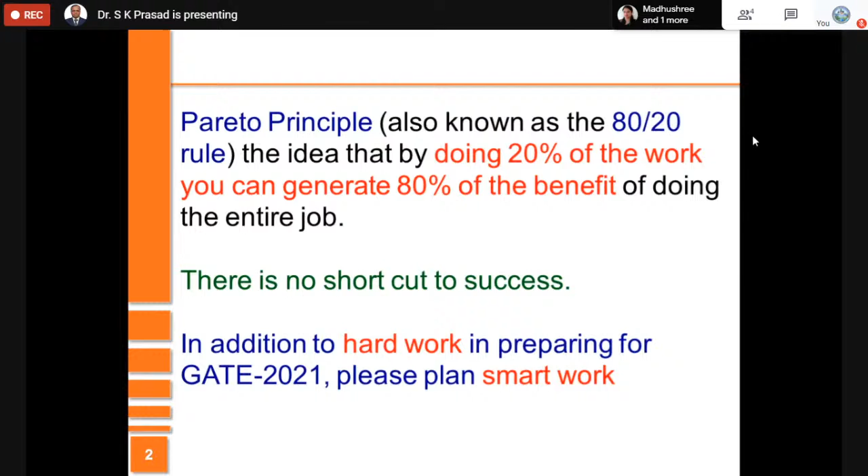He made a good statistics of how GATE questions are covered from 1991 till date. So naturally, statistics plays an important role in giving some idea about the background and the mentality of the question paper setters. Interestingly, you will notice that from the point of view of geotechnical engineering, any GATE examination is very hot in the sense maximum questions come from geotechnical engineering.

Keeping that in mind, and also understanding that geotechnical engineering covers two courses which you do in your undergraduate career, possibly one in 4th or 5th semester, another in 5th or 6th semester, one textbook is sufficient. If you thoroughly understand that, to crack geotechnical engineering in GATE examination, you should not have much difficulty.

And if you do that way, you are very sure that you will approximately get about 15% of the marks, and 15% marks is not a small amount in GATE. So if you take any other discipline, say structural engineering, you may have to study much more vast syllabus. So put in good effort in geotechnical engineering.

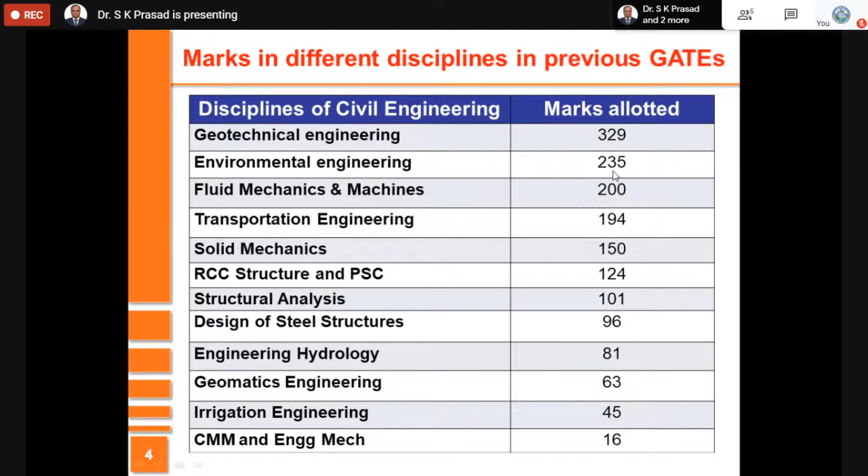He made an analysis since 1991 till date. Maximum marks is allocated to geotechnical engineering. The next highest is environmental engineering, which falls much behind this, almost 60-70% of geotechnical engineering.

So there is every possibility that even this time you have the same kind of trend, like retaining wall, deep foundations, stability of slopes. I'm not sure how much I'll be able to cover today, but these are the portions - what you see on the right side are the portions which I'll have to cover.

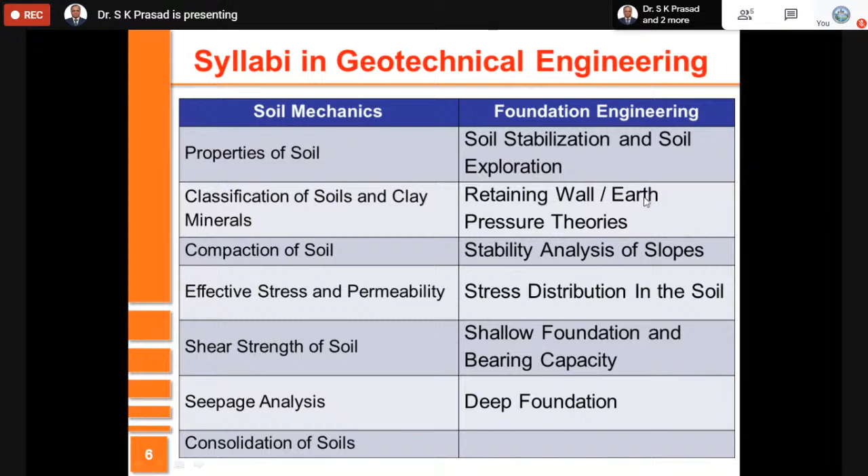I'll be spending my next lecture on foundations, both shallow and deep foundations. I'm hoping that I'll cover these 4 topics today, and I'll have to see how much I'll be able to cover. So these are the syllabi from foundation engineering.

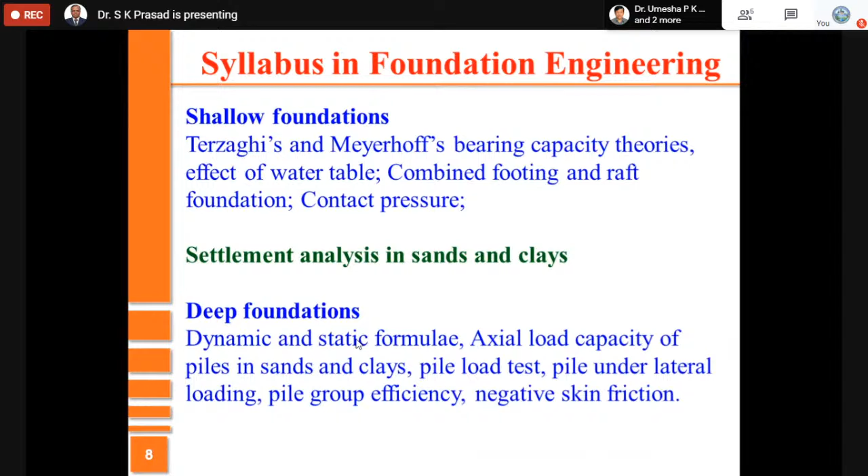As I said: subsurface investigation, earth pressure theories, stability of slopes, and stress distribution in soil, along with the topics related to foundations, both shallow and deep foundations, including settlement analysis.

I'm taking earth pressure theories first because that's one thing which has more emphasis by the question paper setters. There are many researchers who have worked on earth pressure theories, but two classical ones we always talk about are one by Coulomb and another by Rankine.

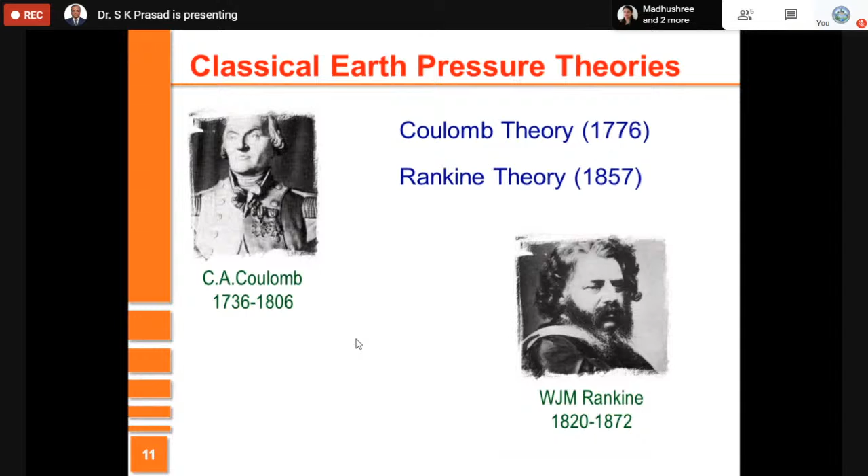Coulomb gave his theory much before geotechnical engineering started getting recognition. We say that geotechnical engineering started getting recognition from the point Professor Terzaghi came into being as a professor in soil mechanics. So in 1776, Coulomb gave his theory, followed by Rankine about 80 years later in 1857.

I'll start with Rankine's theory because it is more analytical, unlike Coulomb's theory, wherein you prefer to use graphical method. So he made a number of assumptions. Unless you make assumptions, you cannot formulate theories. And especially in geotechnical engineering, where a lot of complexities are involved, you need to make many assumptions.

Some of the important assumptions which we generally make in soil mechanics are: soil is isotropic and homogeneous, which never is the case. And in this case, soil is considered to be cohesionless while deriving, but then you are adding the effect of cohesion in an indirect way.

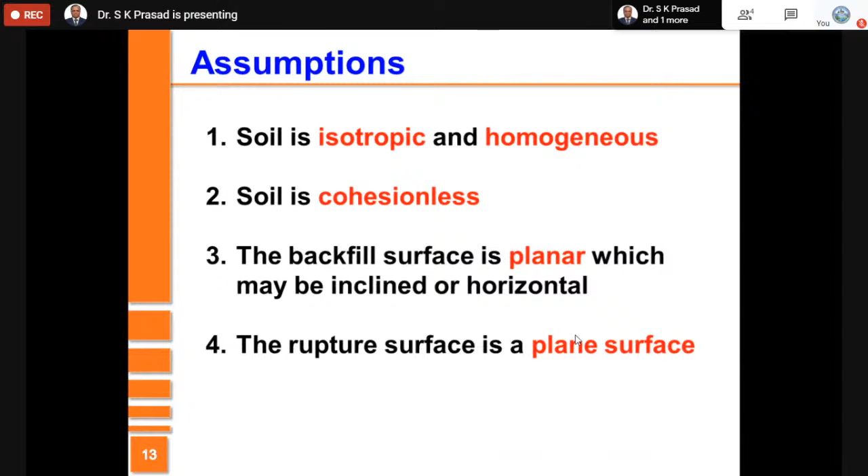And it is planar - basically it's planar. Therefore you may be able to represent the problem in a two-dimensional plane strain situation. Therefore even the failure surface is also considered to be planar. And how accurate is this assumption? Very difficult to say. But then this assumption gives us an opportunity to make our theory relatively simple.

And the failure wedge is a rigid body which experiences translation, so it experiences only one mode of movement.

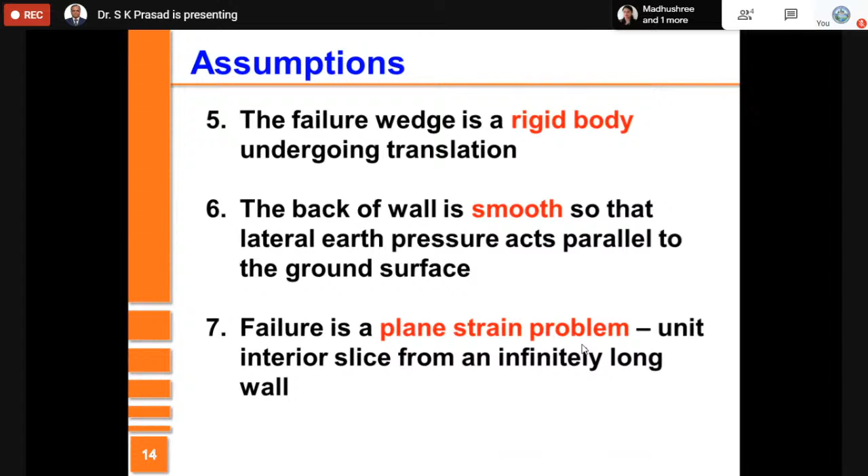Back of the wall is considered to be smooth. Strictly, it will never be smooth. But then, once we consider it smooth, we can avoid the friction between the wall and the backfill soil. Likewise, I said it is a plane strain problem by assuming that we can convert a conventional, regular three-dimensional problem into two dimensions.

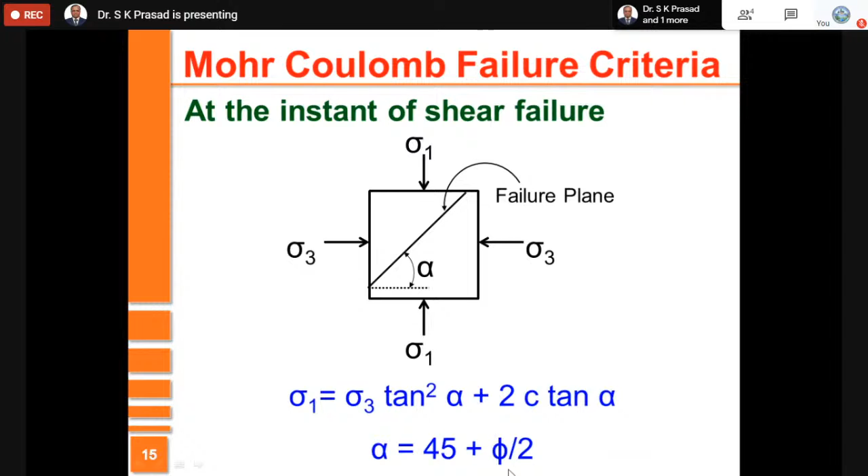Why do you require earth pressure theory? Because in any construction, there are many areas in which you'll have to store earth at two different levels. On one side it is at a higher elevation, on the other side at a lower elevation. This can happen in large embankment kind of structures, and it can happen in underground structures. So you need to hold soil at two different levels.

Soil is a very special particulate material. It just cannot stand by itself vertically. For you to make it stand vertically, you will have to think of some indirect method, or build a wall. When you build a wall, automatically the wall will be subjected to a horizontal pressure by the earth behind it. We have to estimate how much is that pressure, at what level the resultant of that pressure acts, and we should be able to design that wall to take care of that.

So from the point of view of geotechnical engineering, broadly we consider 3 earth pressure criteria: 2 extreme cases of failure, and 1 earth pressure at rest. So earth pressure at rest state, active case, and passive case. These are the 3 cases which are considered.

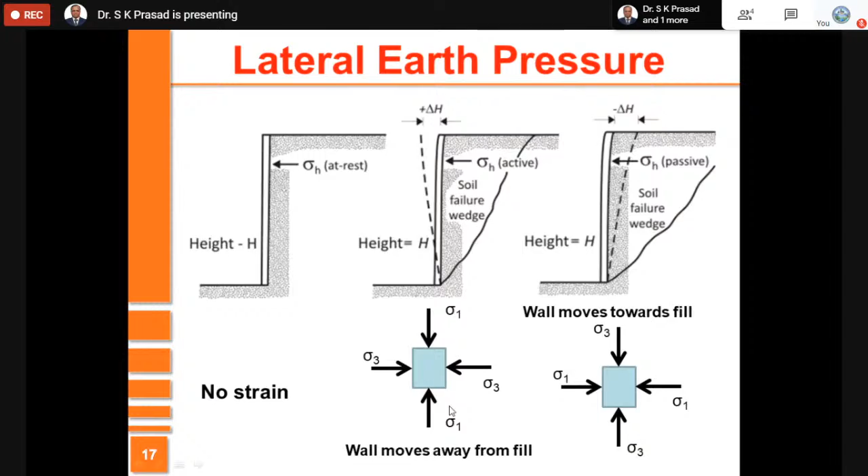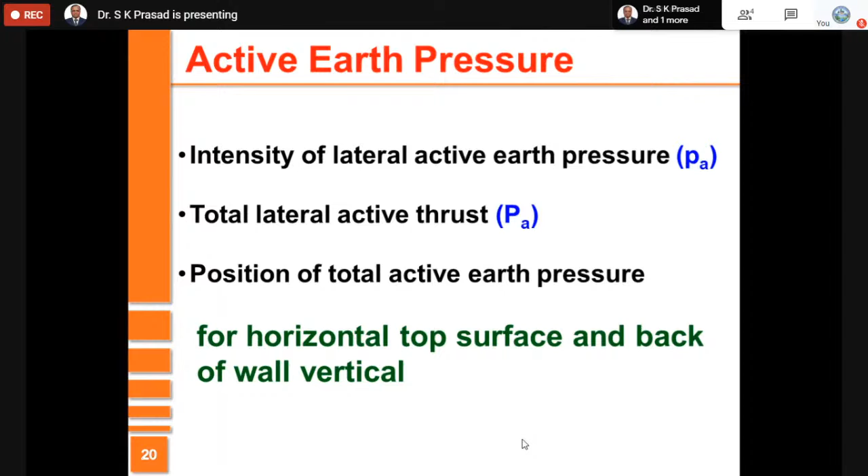Very quickly, I try to go on to different situations in earth pressure. So I'm considering the simplest case: you have a wall, smooth vertical wall, and the soil is horizontal along the backfill portion, and this entire soil is homogeneous. And in active situation, please remember sigma 1 is vertical, sigma 3 is horizontal.

I consider any element at a depth Z below the top surface of the soil, and note that in active case, sigma 1 is bigger than sigma 3, or in other words, the vertical stress is bigger than the horizontal stress. You need to remember that if you have water or any fluid, then the stresses are uniform both in vertical and horizontal direction. The pressure of water is isotropic at any depth.

That means if you consider at some depth, let's say 1 meter depth, water is approximately having a density of 10 kilonewton per meter cube. So at 1 meter depth, the pressure will be 10 kilonewton per meter squared, both in the vertical direction as well as in the horizontal direction.

In case of soil, which is always very peculiar, particulate in nature, at 1 meter depth, if I assume the density of soil is 20 kilonewton per meter cube, then the vertical pressure will be 20 into 1, 20 kilonewton per meter squared. But the horizontal pressure may be either less or more than 20.

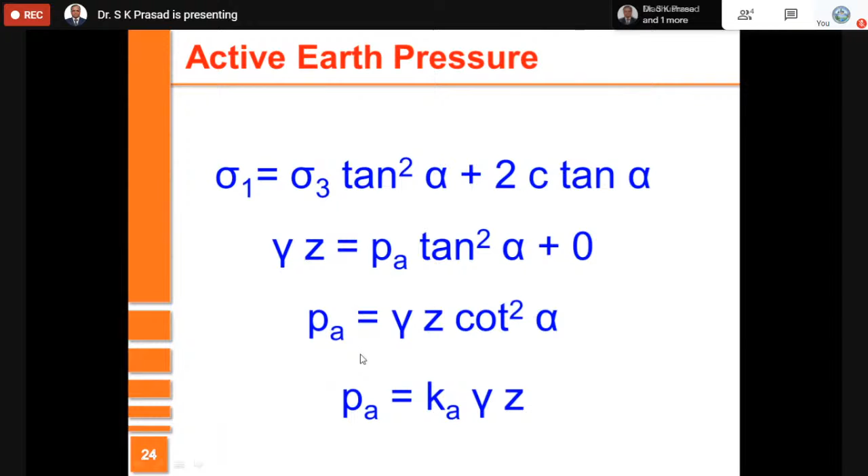This cot squared alpha is represented as a coefficient of earth pressure, and in the extreme situation this K is Ka, that is coefficient of active earth pressure. So cot squared alpha is equal to Ka, which trigonometrically equals cot squared of 45 plus phi by 2, which is also equal to 1 minus sin phi by 1 plus sin phi. If phi is the angle of internal friction of soil, then Ka, the Rankine's coefficient of active earth pressure, is equal to 1 minus sine phi by 1 plus sine phi, or simply cot squared of 45 plus phi by 2. Therefore, the active earth pressure is equal to Pa is equal to Ka gamma Z.

I want you to remember this. So active earth pressure will look like this, and then where will it be maximum? At Z equal to 0, active earth pressure is 0. And at Z equal to H, active earth pressure will be Ka gamma H. So it is triangular, okay?

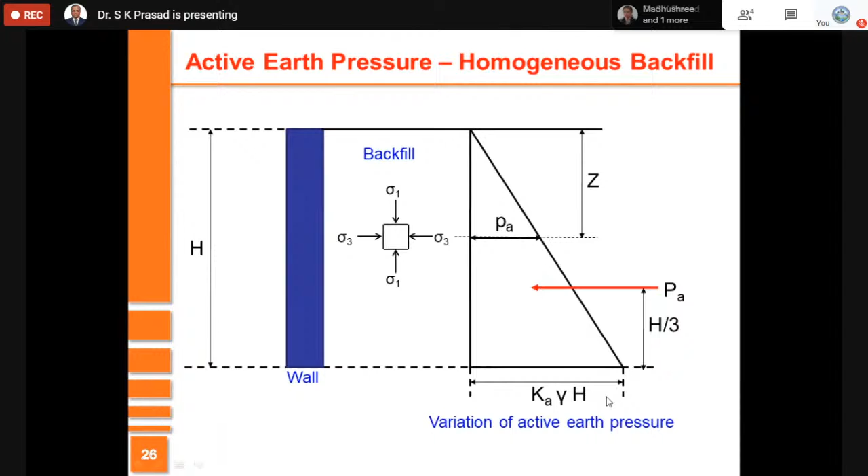Hence the pressure intensity is 0 here and maximum here. So the resultant total pressure will simply be the area of this triangle, which is half into the intensity of pressure multiplied by height, which I call capital PA. Capital PA happens to be the thrust, the total active thrust. And where does it act? Because it is triangular, it acts at a height h by 3 from the base. And PA is equal to Ka gamma h squared by 2. That's what I have put here. I want you to remember this, and this basic fundamental formula you should all have in mind.

So then I keep on applying some additional features to it. In the earlier case, I had considered a situation when there is no surcharge at the top. There may be surcharge due to some structure acting on it, or surcharge because of the overburdened soil above it also. So if there is a surcharge of intensity Q, then you have the original triangular loading due to the soil behind the backfill, and you also have a rectangular loading due to the surcharge, which is equal, in magnitude, to Ka times Q.

Ka happens to be the property of the soil, the coefficient of active earth pressure, equal to 1 minus sine phi by 1 plus sine phi. And here it is Ka gamma h, which is triangular. So you need to consider this plus this. So whenever there is a surcharge, please do consider this additional earth pressure, which is equal to Ka times Q. So always the effect of any surcharge is to increase the earth pressure, and that surcharge will have uniform value from the top.

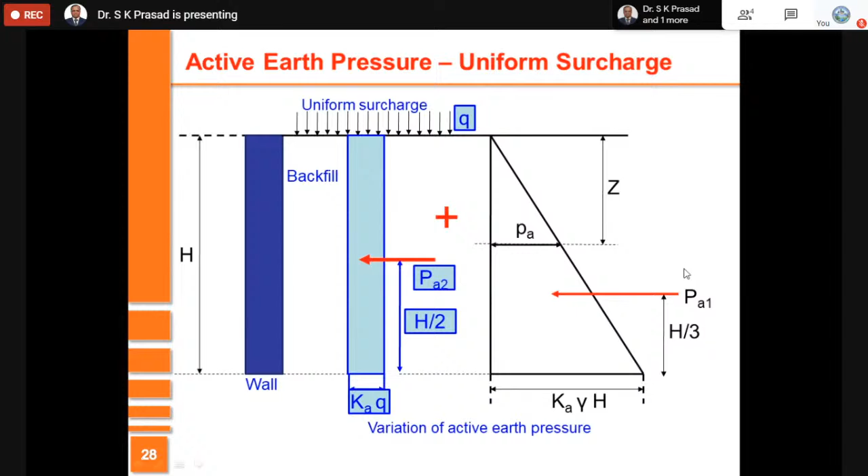So your PA will now be a combination of these two, PA1 plus PA2. PA1 is the case I mentioned previously, Ka gamma h squared by 2. And PA2 is the effect of surcharge, which is Ka into Q into h. And where does it act? It's just your basic fundamentals of mechanics: for a triangular load, the resultant will be at h by 3 from the base, or 2h by 3 from the apex, whereas for a rectangular one, the resultant will be at the center. So the resultant for these two will be a combination of these two, which we'll have to work out using the mechanics principle.

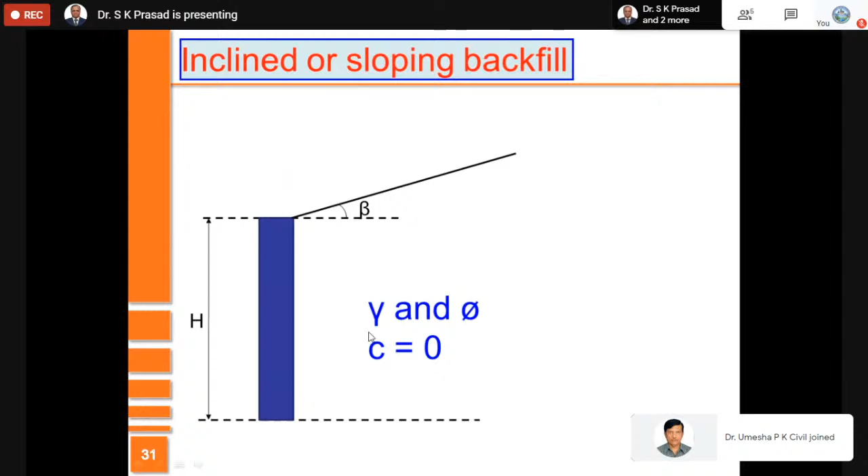You also may have an inclined surcharge. Whenever there is an inclined surcharge, the earth pressure is going to be high. When the inclination increases, earth pressure is likely to increase many folds. And hence, when you are talking about a retaining wall in a hilly terrain, you have to be extremely careful. There have been many failures because of wrong understanding of the earth pressure in these cases. You need to actually consider this effect, and for that you have a big formula.

I wouldn't advise that you should remember this formula, but you should know that in Rankine's theory, we assume that the resultant active earth pressure is also proportional or parallel to the surcharge inclination, so it is inclined at an angle beta. You calculate PA, that is total thrust, the same way you calculate for the other case. But Ka is not going to be just 1 minus sine phi by 1 plus sine phi. You are using this formula, which is a function of not only phi, but also beta. You notice that when beta is 0, this will reduce to that same formula, 1 minus sine phi by 1 plus sine phi. But when beta increases, this value increases enormously. That's what you have to take into account, and hence you have a triangular load, something like this.

Then you also have a situation when the wall is not vertical. If the wall is not vertical, you have a triangular wedge of this backfill which will be carrying this extra load. So what we do is we consider the weight of this. You calculate PA1 exactly the same way as you have for vertical wall. Then you consider these two forces, one vertical force, another horizontal force, and find the resultant of these at whatever inclination you get depending on this angle alpha. So that's the only correction which you need to apply.

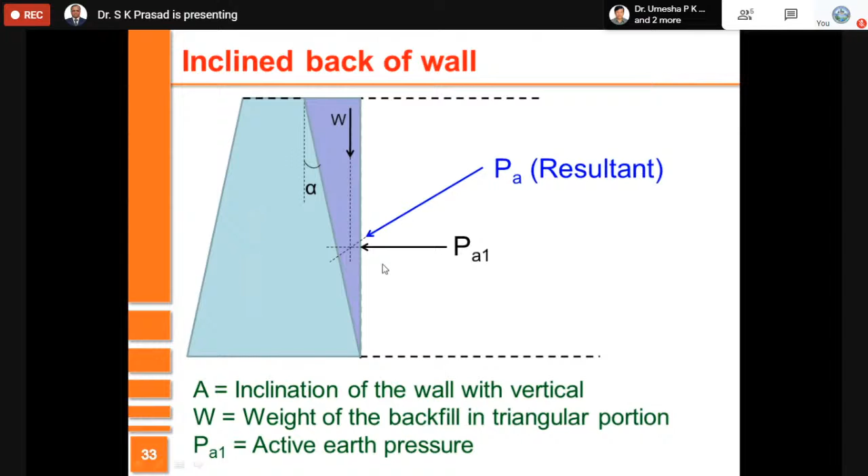And this is all about the earth pressure theory with respect to cohesionless soils for the active case. So then you have the cohesive soil. In cohesive soil like clay, to some extent silt, you need to consider the effect of cohesion, which is one of the other shear parameters. So here you consider C also.

So PA now is no longer only a function of phi, but PA is equal to gamma z cot squared alpha minus 2c cot alpha, because this goes to the other side. So what does it mean? Effect of cohesion is to reduce the lateral thrust. So if you have a cohesive soil, maybe it is able to stand by itself for some height. And at the top, there is a likelihood that there will be some amount of tension. So that's what you have to keep in mind.

So PA is equal to gamma z Ka, cot squared alpha is Ka, minus 2c times root of Ka. And Ka is 1 minus sine phi by 1 plus sine phi. So as I said, all these are positive thrust pushing the wall. But at the top, you have tension. Wall moves, the soil, backfill soil, moves away from the wall. It reduces the stress, so this is on the negative side.

Therefore, sometimes we try to find out till what height this soil can stand without the wall. Naturally, this is negative, so this total will be equal to earth pressure 0. So if I can find out Z naught here, HC is simply 2 times Z naught, and this is negative minus 2c root Ka. How did I get it? Because at Z is equal to 0, this is 0, Pa is minus 2c root Ka. And this value Hc, very easily you can show that it is equal to 4c into root of Kp.

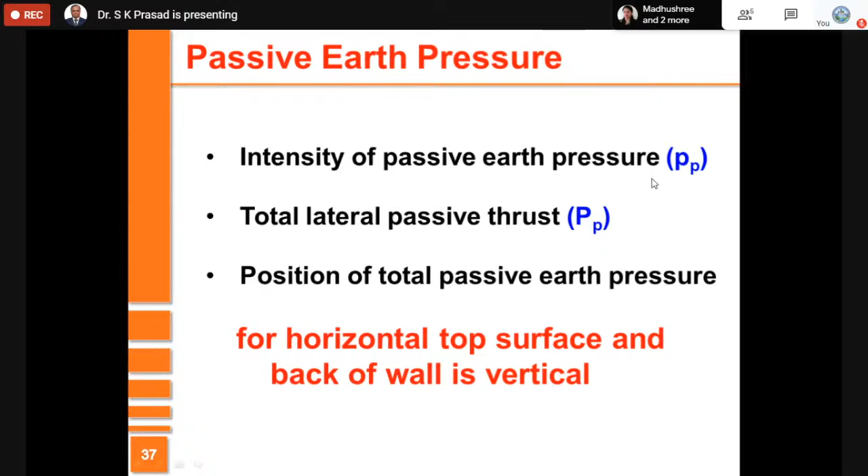Passive earth pressure is very similar to active earth pressure, but in this case the horizontal thrust is bigger. Sigma 1 is the horizontal stress, whereas sigma 3 is the vertical stress. So in this case, sigma h is greater than sigma v.

If you apply the same formula at the time of failure, sigma 1 is sigma h, which is Pp. Sigma 3 is the vertical stress, gamma z. Substitute, and you find Pp equals reciprocal, Kp equals reciprocal of Ka. So 1 plus sine phi by 1 minus sine phi, or Kp equals tan squared of 45 plus phi by 2.

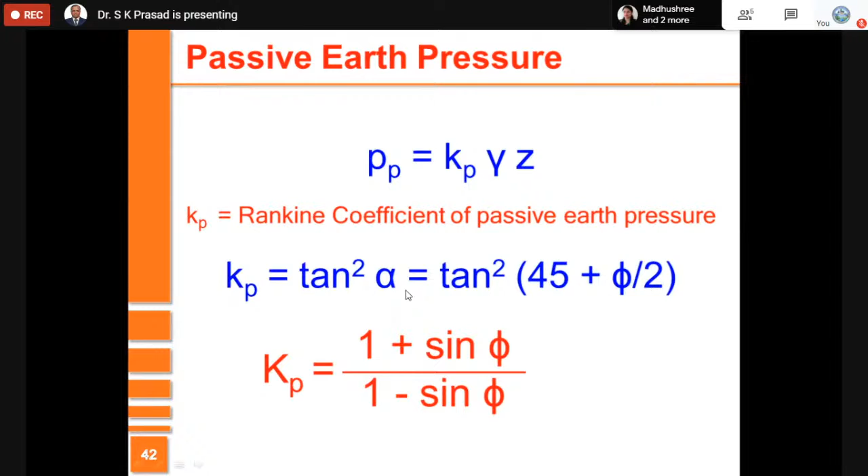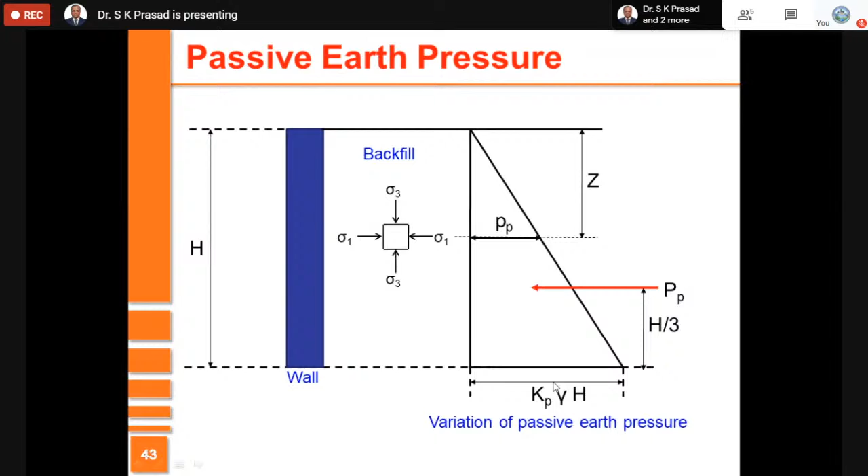When I apply the same rule, the distribution will also be triangular, but this is Kp. Kp is a much bigger value, greater than 1. When phi is equal to 30 degrees, Ka is equal to 1 by 3, and Kp, the reciprocal, is 3. So for passive earth pressure, total thrust will be equal to Kp gamma h squared by 2.

The basic limitations of Rankine theory are that you assume the wall is smooth, so you don't consider the roughness of the wall. If you consider roughness of the wall, you need to account for that extra frictional force, which is not considered. Also, cohesion is used indirectly here; it is not explicitly defined.

So I'll very quickly take up a few GATE problems. You'll have to read this properly.

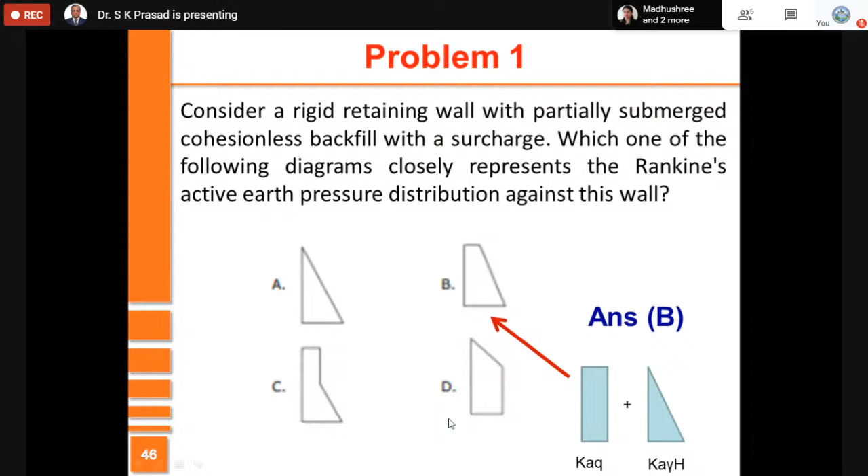Consider a rigid retaining wall with partially submerged cohesionless backfill with a surcharge. Whenever there is a surcharge, what is the best pressure distribution? Without surcharge, for homogeneous soil, the pressure distribution is triangular. For surcharge, you consider rectangle plus triangle, as I told you earlier. Therefore B is the best possible solution, not A, not C, not D. So very quickly you should be able to point out that it is B.

Again you'll have to read it, it takes some time. That's why in the GATE examination I want you to read the question thoroughly, especially in geotech, because the phrasing is too lengthy.

You have a retaining wall of height h with a smooth wall. Whenever it is a smooth wall, Rankine theory can be applied. It has a backfill inclined at an angle beta with respect to horizontal, consisting of cohesionless soil only, with internal frictional angle phi. If the active lateral thrust acting on the wall is Pa, which one of the following statements is true?

I take the first one itself, which is the answer. Please note, whenever you have an inclined backfill, the total thrust will also be parallel to the inclination, so it is also beta. This distribution is triangular, and hence the location of the thrust is at h by 3 from the base. So Pa acts at h by 3 from the base of the wall, at an angle beta with respect to horizontal. This is the correct answer.

Option B says it acts at h by 2. Option C says h by 2 and the angle is not beta but phi. Option D says it acts at h by 2 but the angle is beta. Another says it acts at h by 3 but angle is phi. So very easily you can eliminate B, C, D. Therefore A happens to be the right answer.

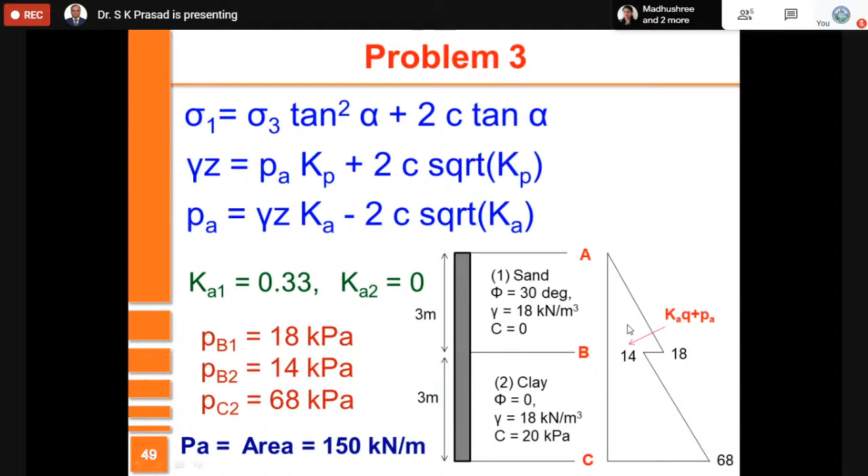Likewise, you find out at the bottom. At the bottom again, you apply Z is equal to 3, and then you take the effect of cohesion. You find this value to be 68. So the distribution is of this kind. Total pressure is simply the area - you have this triangle, plus this rectangle, plus this triangle. When you take all these things, area is equal to 150 kilonewton for 1 meter length perpendicular to the wall. So this total will be 150, and that is what is given here.

So many a times it is a multiple choice question you should be able to solve.

So you find out Ka for the first one, Ka for the second one. Please note, whenever phi is small, Ka is higher. So in a loose soil, a soil which has less strength, the value of active thrust is more. So if you want to make the retaining wall have lesser thrust from this backfill soil, you need to densify it very well.

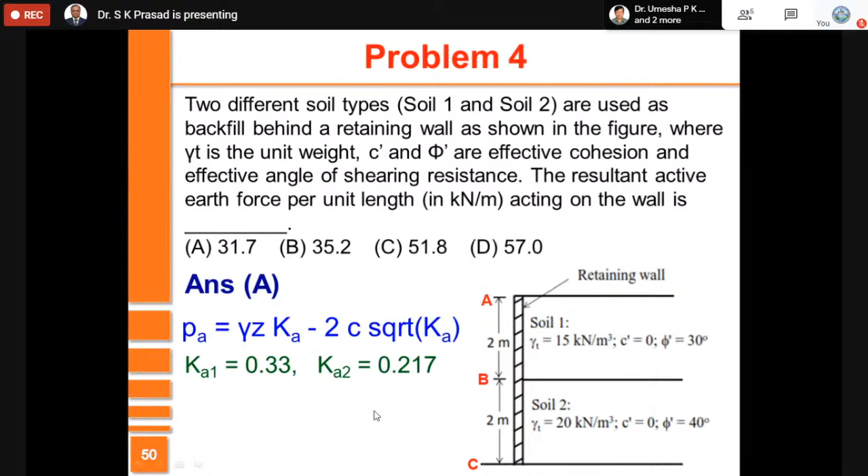On the other hand, for denser soil, Ka2 is 0.217. Taking the same approach, I have arrived at the pressures at point A, B, and C. Point A, of course, is 0. Point B, due to the first soil, I get this value, which is equal to 10. Due to the effect of surcharge on the second soil, I get this value of 6.51, and this is this rectangular portion. Then for the effect of the third soil, 8.68. Total pressure is simply the area of this triangle plus this rectangle plus this triangle, which amounts to 31.7, which is also one of the solutions.

And hence, I have many other problems. A 3-meter high earth retaining wall retains dry granular backfill of angle 30 degrees, unit weight 20 kilonewton per meter cube. If the wall is prevented from yielding, that means there is no strain allowed.

This is for a situation of earth pressure at rest. You remember, in a cohesionless soil, earth pressure at rest is 1 minus sin phi. As per Jaky, who gave a research solution, K naught is equal to 1 minus sin phi. This simple solution we use, and hence you need to find out how much is the total earth thrust.

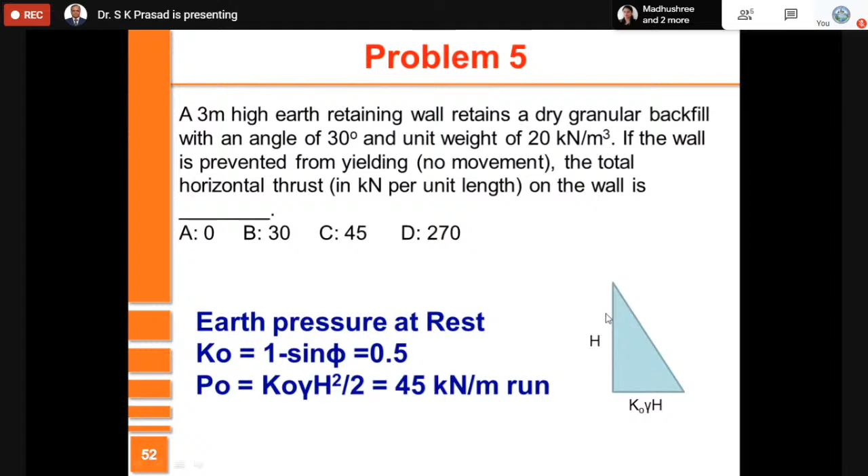So here, instead of Ka, I have put K naught, and you find out that this value is equal to 45 kilonewton per meter run.

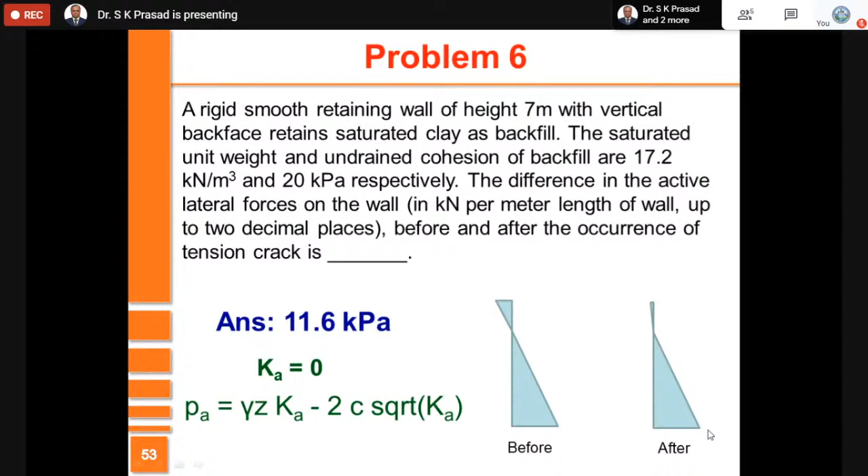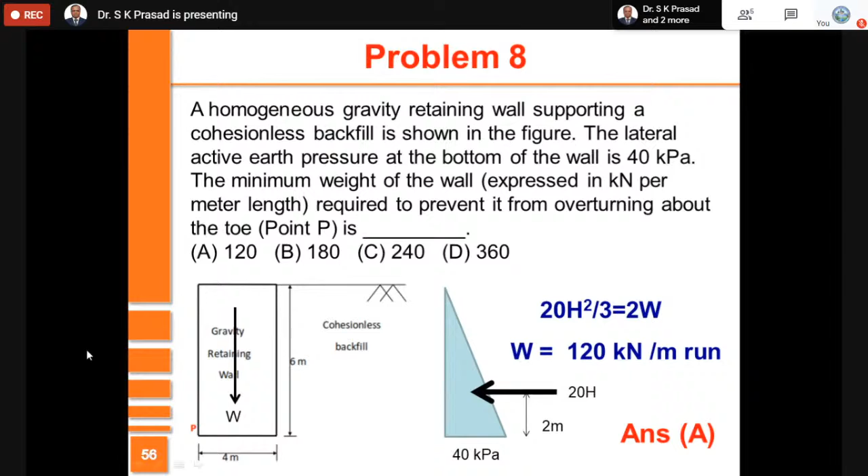So likewise, here you have a situation when you have the total pressure of magnitude equal to 20 times H. And this is going to cause a toppling moment equal to 20 times H into this value equal to 2 meters. Entire thing is resisted by the weight of the wall. This is a gravity retaining wall. So this 20H into 2 meters is countered by weight into this lever arm of 2 meters. And you have to find out how much this weight should be. You find that value is equal to 120 kilonewtons per unit length.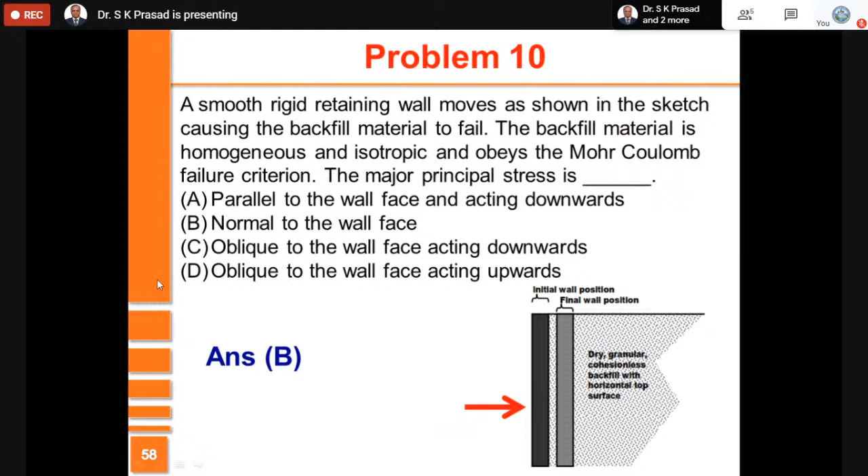So I can keep on talking about different methods, but I'll have to quickly go ahead.

Coulomb's theory has many assumptions. I'm going to just very quickly mention: homogeneous, isotropic, undeformable. That means the rupture plane is a rigid plane, okay, and it has a plane surface. Failure is as a rigid one in translation only, and when the soil wedge is impending, that is at the time of failure, the theory gives two extreme cases: active and passive. The position and direction of the earth pressure is known.

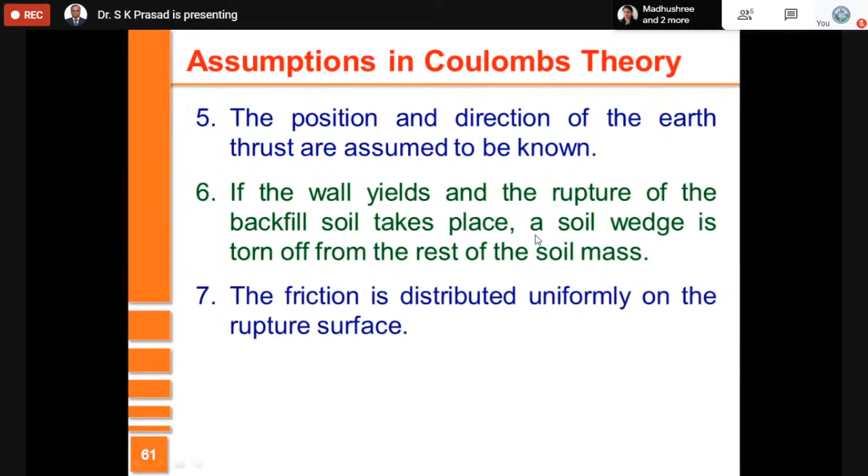If the wall yields and the rupture of the backfill soil takes place, the soil wedge is torn off from the rest. That is, the entire soil wedge acts like a rigid body, getting torn off from the rest of the soil. Friction is distributed uniformly, so you consider the wall friction here. For a rupture plane within the soil mass, as well as between the back of the wall and the soil, Newton's law of friction is valid. The back face is plane, the backfill surface is plane, and the failure surface is a plane strain problem like in the other case.

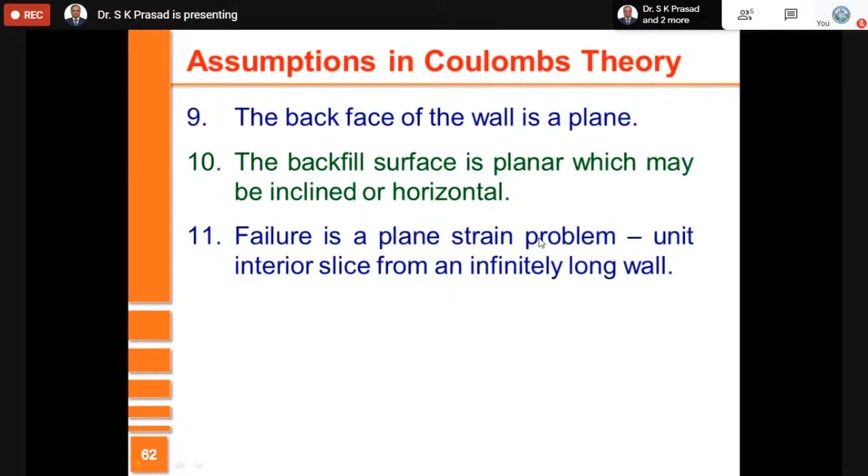So you have the wall, which may be vertical or inclined, which may be rough also, and this is the wedge of soil which comes out. This wedge of soil has got weight, and this is the one which slips. This is the rupture surface, and hence the shear strength in the soil holds it from slipping, and there is also the frictional resistance here.

So you need to consider this weight. You need to consider the resultant force, which is considered to be at an angle phi, and you need to consider the friction. Therefore, you have the main forces which are considered as weight, which has both magnitude and direction. Then the soil reaction, which is equal to phi with respect to normal of the failure surface.

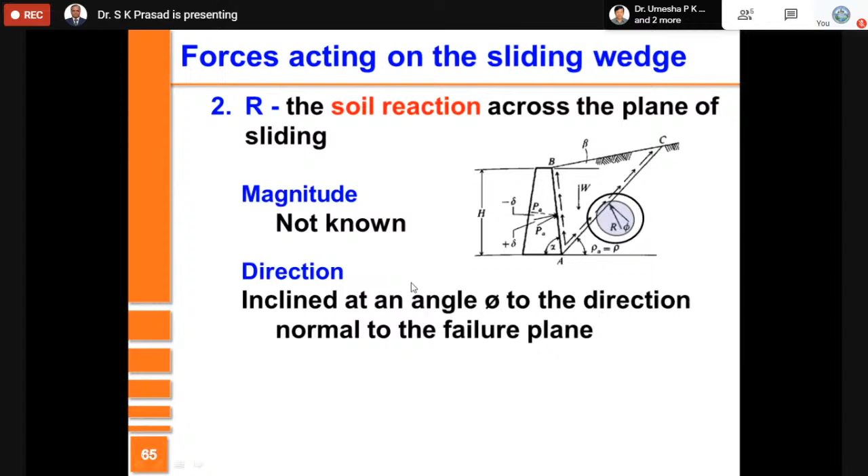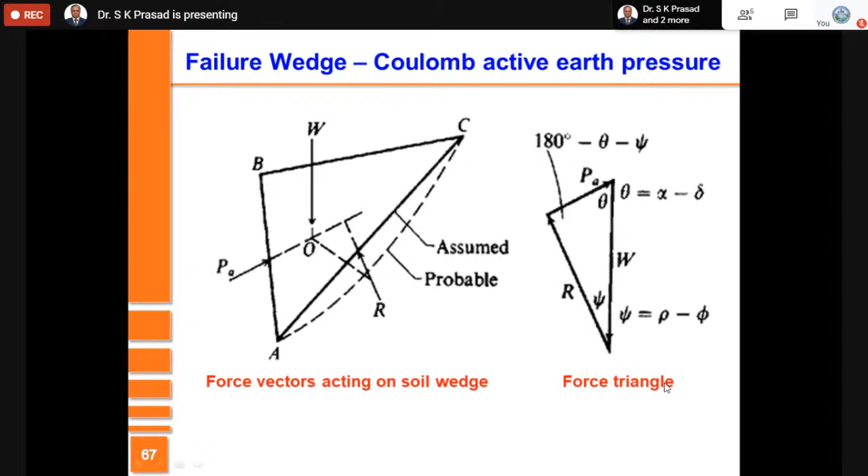And then you have the active earth thrust, as shown here, which also takes into account the wall friction, whose magnitude is not known, but the direction is known. So you can simply write the force triangle in which the weight, both magnitude and direction, are known, and the reactions, the soil reaction as well as the active thrust, their directions are known, but the magnitude is not known. By simply drawing the force diagram, you'll be able to find R and PA. That's what Coulomb's theory says.

The main limitations are that it does not satisfy the static equilibrium condition, which actually occurs in nature. Soil is considered as an ideal one. Error due to curvature of slips or plane is not considered properly. So there are some advantages and disadvantages of both methods. The friction between wall and soil is not considered in Rankine theory, whereas it is considered here in Coulomb's theory. Soil behind the wall is considered as a whole mass, a rigid body. Its deformations are not considered in both cases, to be precise, but definitely not in Coulomb's theory. Lateral pressure is not limited to vertical walls only in Coulomb's theory.

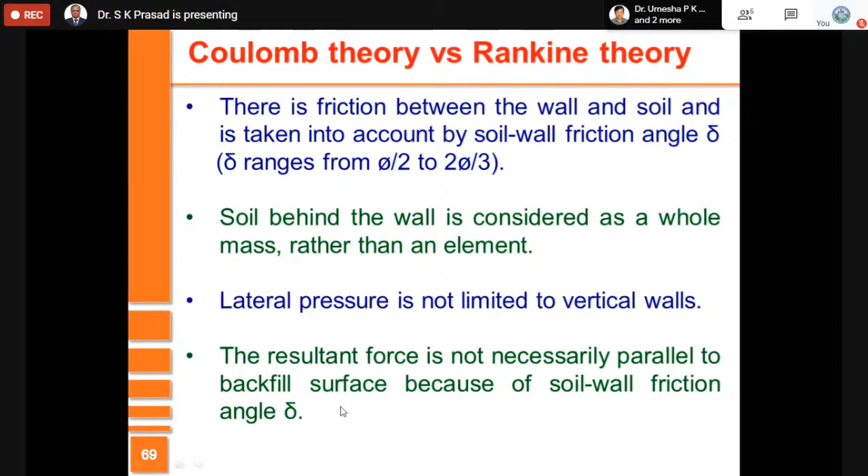The resultant force is not necessarily parallel to the backfill surface because of the soil wall friction. On the other hand, in Rankine theory, the resultant is considered to be parallel to the backfill surface, perpendicular to the wall surface.

Okay, so quickly I go on to the other portions. Subsurface investigation is extremely important. I always keep saying that we know quite a lot above ground, even in space, but what is happening below ground, we find it very difficult to understand. So unless you know what type of soil is there, what kind of strength, stiffness, and other properties soil imposes on us at that depth, it is very difficult to build any geotechnical structure.

So we have made different methods by which you do the subsurface investigation, and basically by this investigation you try to find out the properties of soil at different depths. For doing that, you either require a field test, or these days we also use many non-destructive testing methods wherein you use subsurface investigation based on the wave theory. But to actually find out the properties more accurately, you try to do that by taking soil samples from the field to the laboratory, and you have to see to it that the sampling does not disturb the soil.

Soil is a material which gets disturbed, which is very sensitive, and the amount of disturbance you give should be as minimum as possible. To understand the disturbance, you try to use a few parameters called area ratio, inside clearance, and outside clearance with regard to the soil sampler.

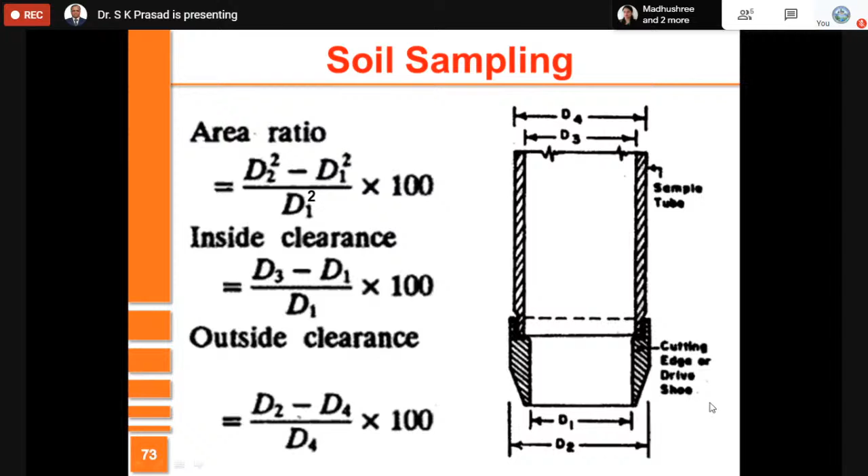So these are given by the formula like this. I would like you to go through, and most of the times the area ratio is asked. So if you see at the bottom, you have the inside diameter, you also have the outside diameter. Inside diameter I have called here D1, outside diameter I have called D2. Area ratio is D2 squared minus D1 squared, divided by D1 squared, in percentage.

There are a few important things you should know. Area ratio should be as small as possible; in general, it should be less than 25%. And if you want to sample very sensitive clays, it should be even less than 10%. Inside clearance should be between 1 and 3%. Outside clearance should be less than inside clearance.

So the friction in the wall should be as minimum as possible, which means you need to oil the surface to reduce the friction. The non-return valve permits easy and quick escape of water and air, which are not required, from the sample collection. So D1, D2, D3, D4, as explained, are mentioned here.

So you may have questions like: the degree of disturbance of sample collected by the sampler is expressed in terms of area ratio. If outer and inner diameters are DO and DI, the area ratio is given by, as I said, DO squared minus DI squared, divided by DI squared, into 100. That's what you have to write.

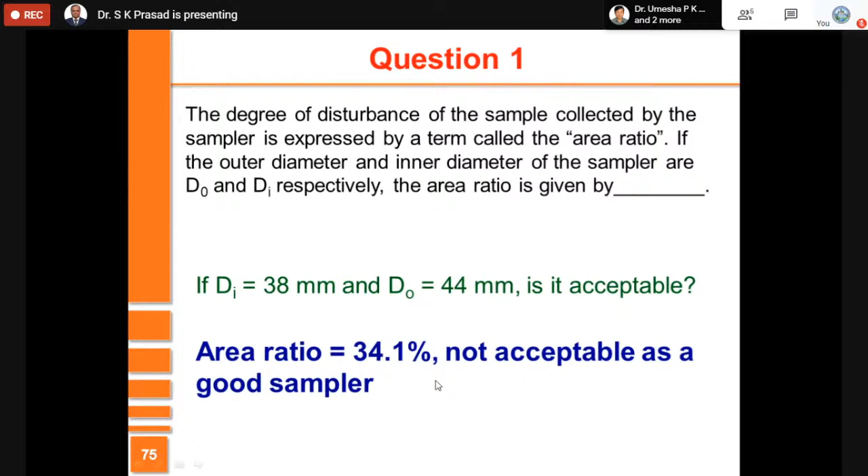Sometimes you may be given the values: DI is 38, DO is 44. Is it an acceptable one? You find out the area ratio. In this case, the area ratio is found to be 34%, which is much higher than what is acceptable, 25%. Therefore, it is not acceptable.

So you have another question here: which of the following statements is true for degree of disturbance of collected soil sample? You'll have to read this properly. Thinner the sampler wall, lower the degree of disturbance. Naturally, if you have a thin wall, the disturbance you create to the soil while collecting the sample will be less.

So A is the correct answer. B says thicker the sample, lower is the disturbance - naturally B is ruled out. Thickness of the sampler wall and degree of disturbance are unrelated - no, this is also ruled out. Thickness of the wall really plays an important role. Degree of disturbance of collected sample is proportional to the thickness, not necessarily the inner diameter of the sampling tube. Therefore, A is the right answer.

Then you have the plate load test. I wouldn't like to go very deep into it, but this is one of the best field tests from the point of view of obtaining the bearing capacity as well as settlement of soil, because it exactly resembles the actual field condition. But then it has many difficulties also, many disadvantages also.

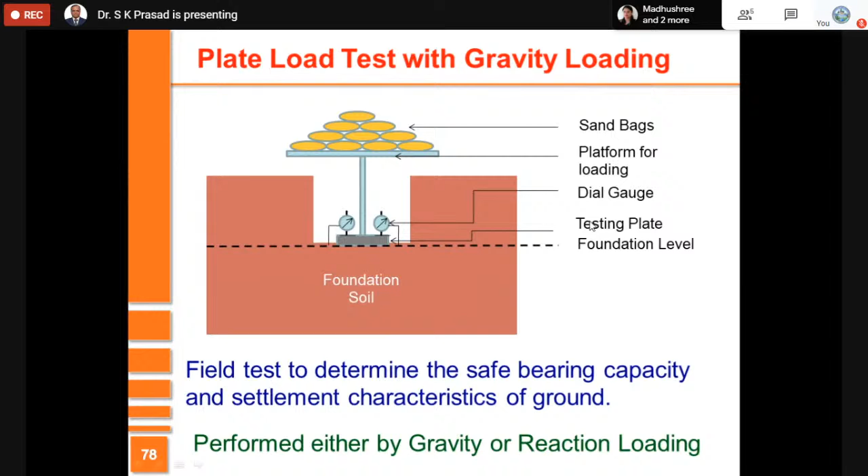You have a plate which replicates the behavior of a footing. Size of the plate is much smaller than that of the footing. You load this plate at the level of the foundation. For loading, you either use reaction loading, or gravity loading. Gravity loading is done by putting some weight through sandbags. Reaction loading is done through a truss-like thing.

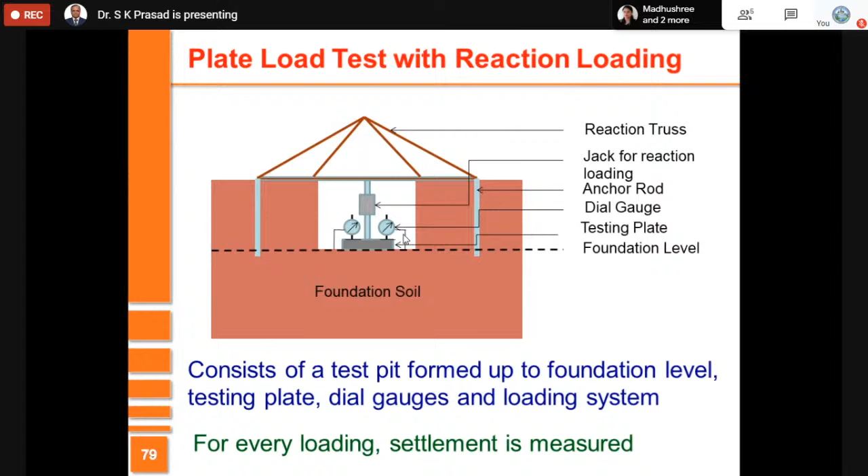Once soil fails, settlement continues forever. There may be some peak which is formed, and afterwards continuously settlement happens. On the other hand, you may not find a peak at all - settlement continues to happen with the load. So depending on the shape of the load-settlement curve, you may be able to explain what kind of failure the soil experiences under the footing, in this case under the plate.

So you have a good method of doing the test, but there are some advantages and disadvantages of this. I'll try to read out very quickly the advantages and disadvantages.

One of the biggest advantages is that it provides two important things. One is it considers the total failure, shear failure. The other is it considers settlement. So it gives the allowable bearing pressure, taking into account both shear failure as well as settlement.

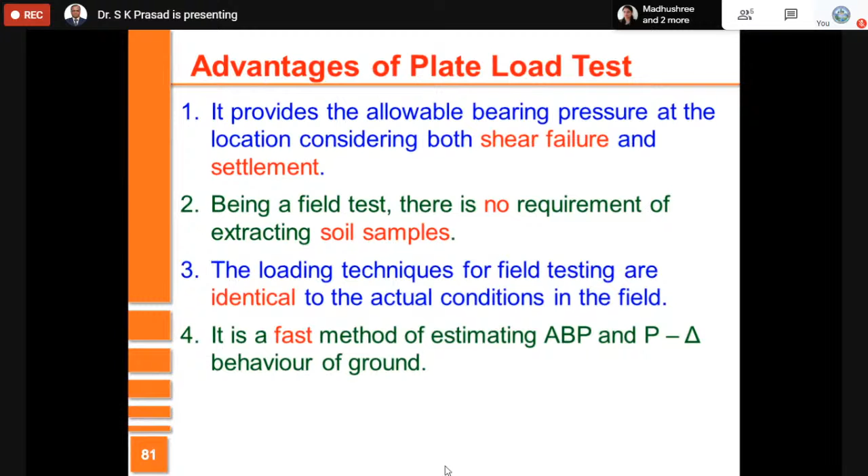You don't have to extract a sample because you do the test directly on the ground, and the loading is very similar to the load which you apply in the field. It is basically a quick method - you may have to do the test for about a week and get the analysis done, and that's it. Very quickly you can know the load carrying capacity of the ground.

But then there are many disadvantages. Test results reflect the behavior of the soil just below the plate. It is small sized compared to the footing, so the footing may be 5 times, 10 times bigger than the plate. So it only represents the behavior very close to the plate, but at deeper elevations the soil may be very different. If at deeper elevation the soil is weaker, we may be overestimating the bearing capacity.

Because it is a short duration test done for a week or so, you may not be able to calculate the settlement properly. Size effect will be very pronounced in sandy soil, which is not considered. Generally it's a cumbersome procedure - you have to do the test for a week in the field under sometimes abnormal conditions. You don't have a controlled situation, so it's a tough environment in the field where you have to work.

These are some disadvantages. Remember, the settlement is proportional to the width of the footing or the plate. In granular soil, you use this formula; in clay soil, you use this formula. Settlement of the plate is proportional to width of the plate, and settlement of the footing also is proportional to width of the footing.

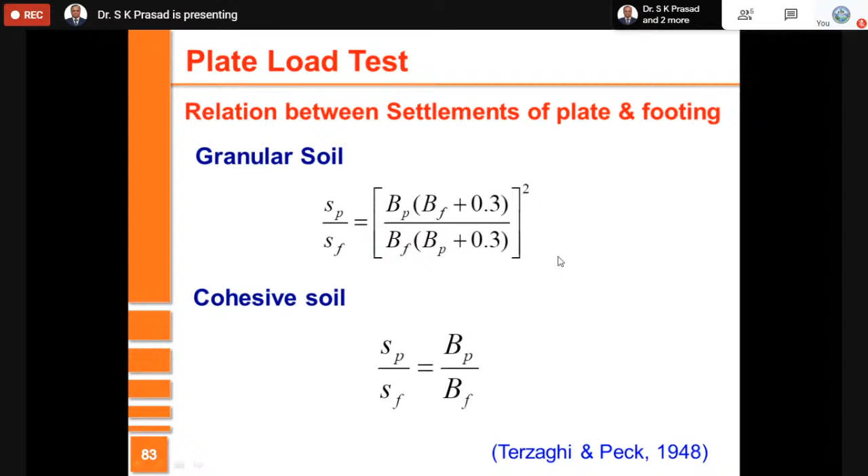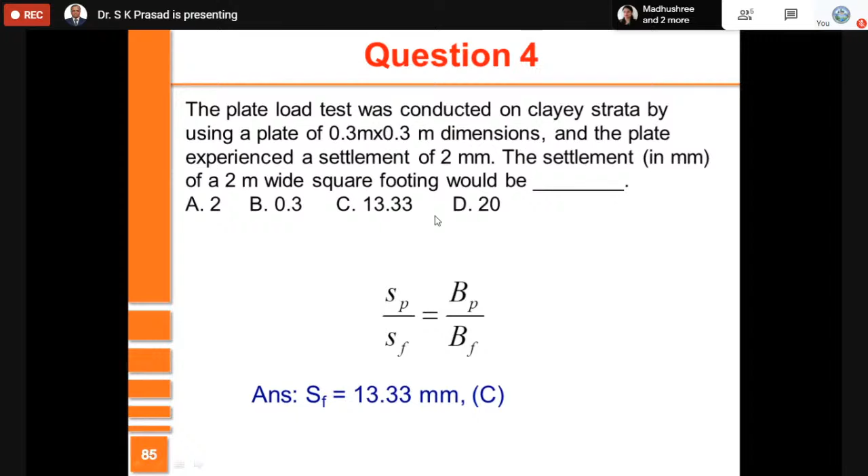So you have a situation here where the settlement of a 0.3 meter by 0.3 meter plate is 2 millimeters. What will be the settlement of a 2 meter wide square footing in clay soil? I showed you this equation, use it and find that for a small plate, when the width is small, the settlement is also small. For a bigger footing, the settlement will be bigger, found to be 13.33 millimeters. So you can rule out B automatically, it has to be bigger, and you can also rule out A because it has to be bigger. A and B are ruled out, and among these two, you will have to use this formula to find the value.

Standard penetration test is one of the best known field tests for determining the properties of soil. What you determine here is N, the standard penetration number. It is determined at various depths, and for that you will have to make boreholes. You make a clean borehole approximately 100 mm in diameter, but sometimes it could be less than that.

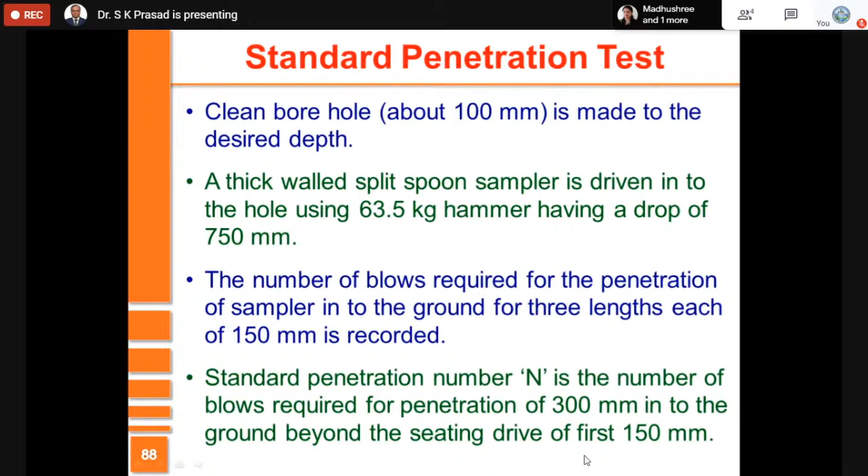You take a thick walled split spoon sampler, place it vertically in the borehole at the desired depth, and from the top you hammer using a hammer of weight 63.5 kgs dropped from a height of 750 millimeters. You drop it and find the number of blows required for penetration of the sampler into the ground for every 150 millimeter length, totally 3 lengths. N is regarded as the number of blows required for penetration in the next 300 mm, the second and third 150 mm, after the first 150 millimeter penetration, which we call the seating drive. So N is equal to penetration for 300 mm after you achieve 150 mm penetration first.

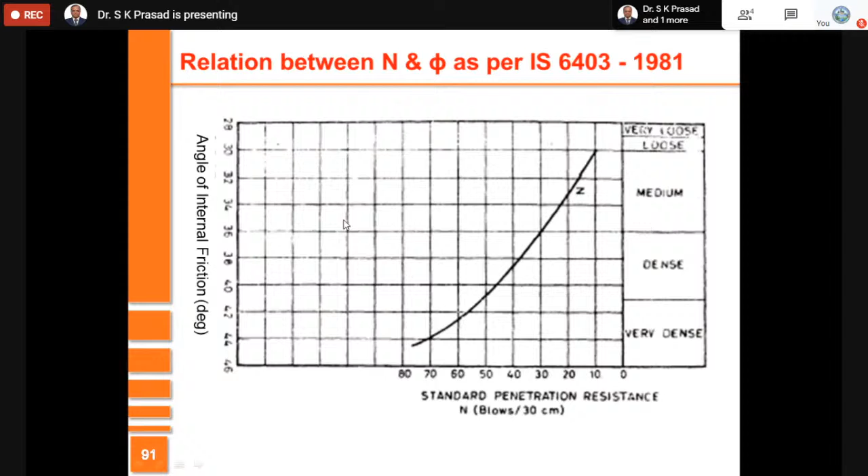You can correlate N with many properties of soil, like allowable bearing pressure, as given by Teng, and relative density of soil. This is in IS code IS 6403 as a function of phi. So you can directly relate N with phi, and you also will have to apply some corrections.

The major two corrections we apply are, one is overburden pressure correction and the other is dilatancy correction. Overburden pressure correction is equal to some coefficient correction for overburden pressure multiplied by the measured N value. There are many people who have given this value of Cn. I have just taken Gibbs and Holtz value of Cn like this. You don't have to remember this, but it is better if you do. Corrected value of N is 15 plus half into measured N minus 15, which is the effect of dilatancy.

This dilatancy correction applies in saturated cohesionless soils, saturated sandy soils. When it is dense, you will notice that the measured value is more than the actual value. When the same soil is loose, you'll notice the measured value is much lower than the actual, because of the existence of pore water pressure. In one case it is positive, in the other case it is negative.

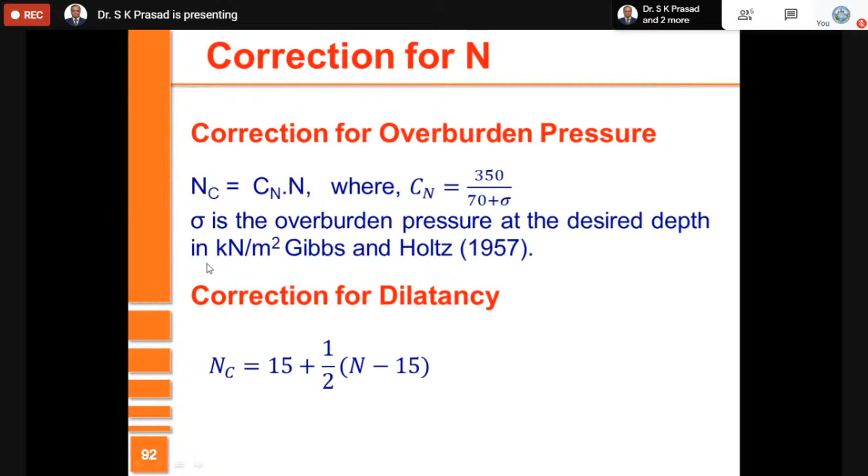So the test procedure I have written, which is very simple: you put the sampler vertically in the borehole, and from the top you hammer it using a hammer of weight 63.5 kgs dropped from 750 millimeter height.

Some advantages and disadvantages: the test procedure is simple, and N can be correlated with many properties of soil, including dynamic properties. Samples collected in the split spoon sampler can also be used for laboratory testing, so a sample is also collected. It is a quick test, and you can determine N at intervals of 1 meter, sometimes even 0.5 meter, in the borehole.

What are the disadvantages? You are using dynamic load, applied dynamically to determine static properties of soil. How accurate is it is a big question mark. You are not able to get continuous recording. You require a borehole to be made and extended continuously. Sometimes if you come across a pebble in between, the N value will be much higher than the actual case. Results also depend on the equipment used and the people who handle the equipment, which should not be the case.

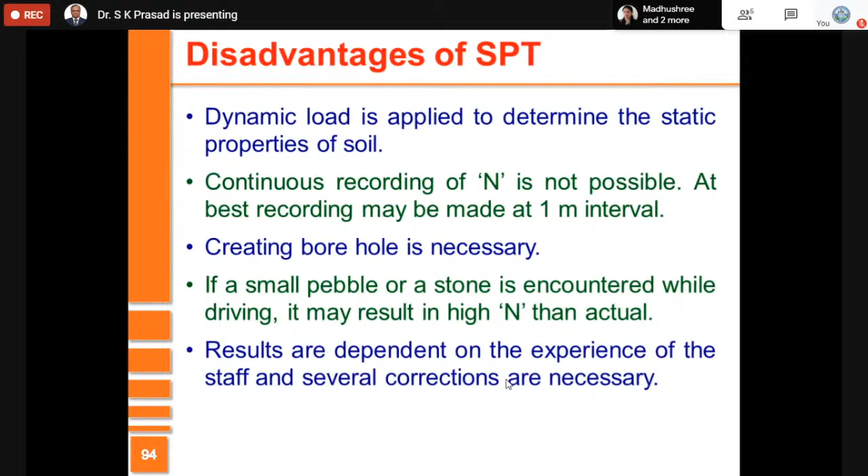So some questions: if in saturated fine silty sand, measured N is 3, what will be the corrected value? The moment I say fine silty sand, you have to use this formula: corrected value of N equals this. So this is 3. 3 minus 15 is 12, minus 12 by 2 is minus 6, and 15 minus 6 is 9.

So the actual value is 3, but the measured value is 3, and the actual corrected value will be 9. So in loose soil, you measure much lower than the actual value. Instead, if N is 33, fairly high, fairly dense soil, you'll notice that the corrected value will be lower than the measured one.

Likewise, consider here the effect of overburden pressure. In this case, overburden pressure at the ground surface, if the measured N at the surface, ground surface, is 20, what is the corrected value of N? At the surface, because of lack of confinement, you get a value always lower than the actual.

I have measured it as 20, and when I use the Holtz and Gibbs formula, Cn is equal to 5, and this value will be 100. Corrected value will be 100 instead of 20 what you have got. You have 4 answers: more than 20, less than 20, equal to 20, and having no correction at all. Having no correction is a better answer choice, but actually the measured value at the surface is 20, while the corrected value will always be greater than 20. So the answer is A.

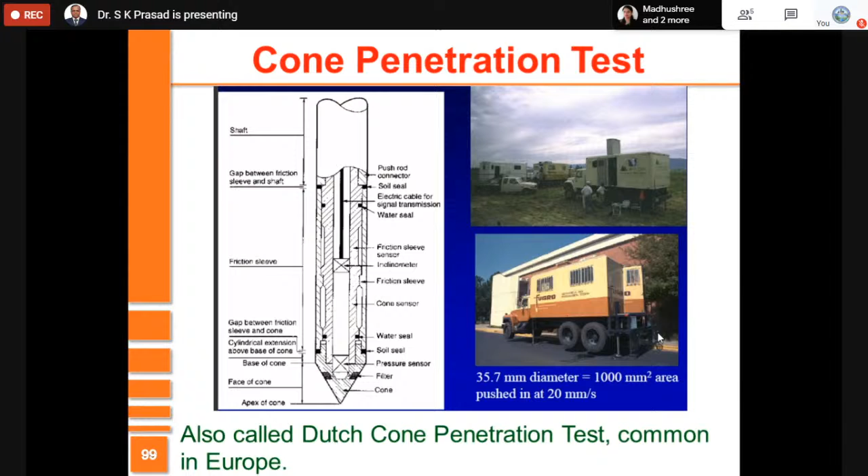You also have the cone penetration test, which is a more adopted test in countries, in European countries. So it's sometimes called the Dutch cone penetration test also, and it is in our IS code.

You're going to use a cone in this case along with a steel rod, and you use jacks for lowering it. You don't require a borehole to be made. This requires sophisticated equipment. So what you do here is you have a steel tube and the cone with a rod. First you lower the cone for some distance, 8 centimeters.

You find out the pressure required for penetrating that using the jack, and you can have a load cell or anything to find out what pressure is required, then lower the steel tube up to that point, 8 centimeters. Then lower both the steel tube as well as the cone. So when you lower only the steel tube, you measure the resistance of the side, skin friction. When you push only the cone, you measure the end bearing resistance. When you push both of them, you find out this as well as this, so you can separate out the effects of these.

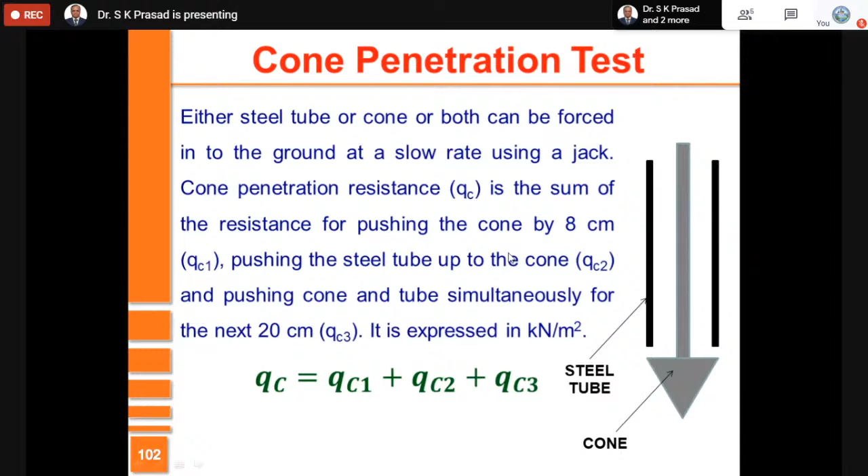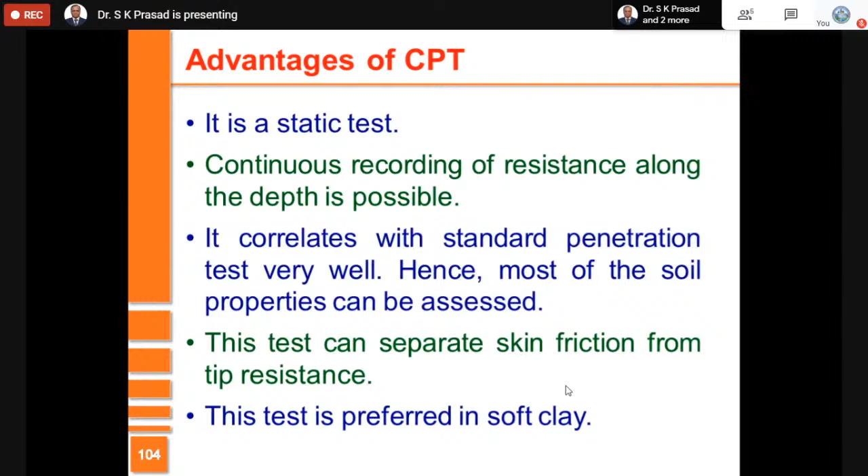So you don't require a borehole, and you can continuously determine the value of the resistance in this manner. It's a static test, unlike SPT, and you can make continuous recording. You can use these relations with many of the soil properties, just like SPT. You can separate out skin friction from tip resistance. This test is preferred for soft clays.

Some of the disadvantages: it is more tedious, the equipment is very expensive, results are likely to be affected by the speed of penetration, the test requires costly equipment, and it requires more skilled labor.

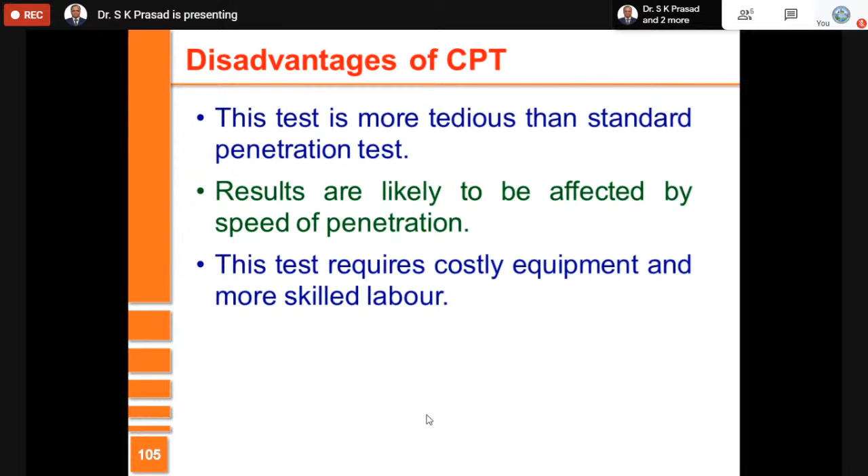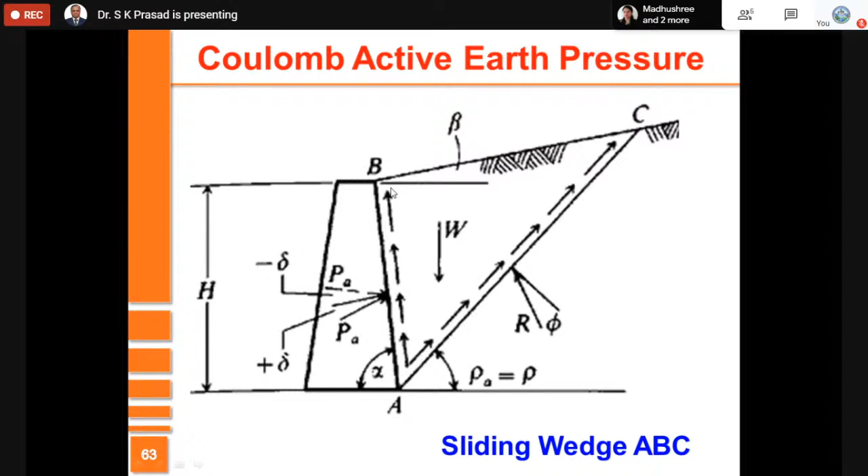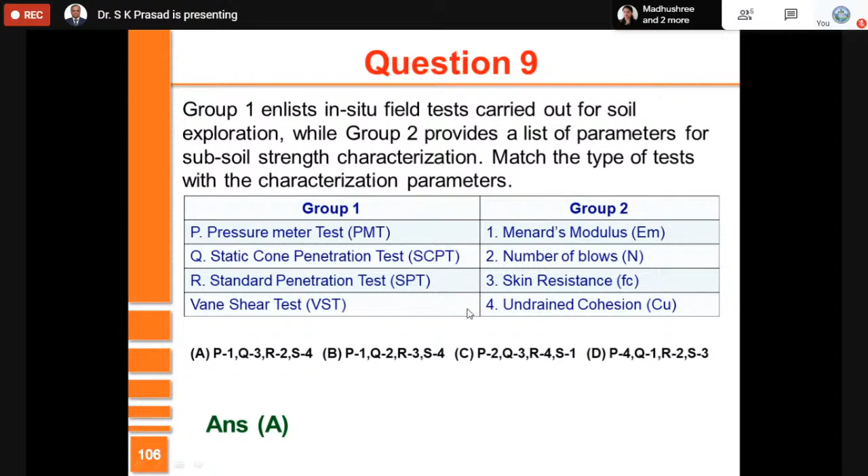So P is matched with 1, Q is matched with 3, R is matched with 2. I forgot to mention, S is matched with 4, so the answer is A.

So I go further, stress distribution in soil. This is another very important topic.

Soil has different levels of stresses due to its own weight. At the top, there is no weight on top of it, but when you go deeper and deeper, the weight of soil above will exert extra stress, which we call geostatic stress. So the deeper you go, geostatic stresses keep increasing.

On the other hand, there is also an additional stress applied due to the weight coming from some structure - it could be a dam, it could be a building. That additional weight is also a stress, and it will be maximum at the point where it is applied. As you go deeper or radially, the stress will decrease. Therefore, the total stress will be geostatic stress plus the stress due to the structure applied.

Geostatic stress is simply gamma times Z for the vertical stress. Horizontal stress will be K times vertical stress. K, when there is no extra strain, is K naught. When there is extra strain, it depends on whether the soil moves away from the wall or towards the wall.

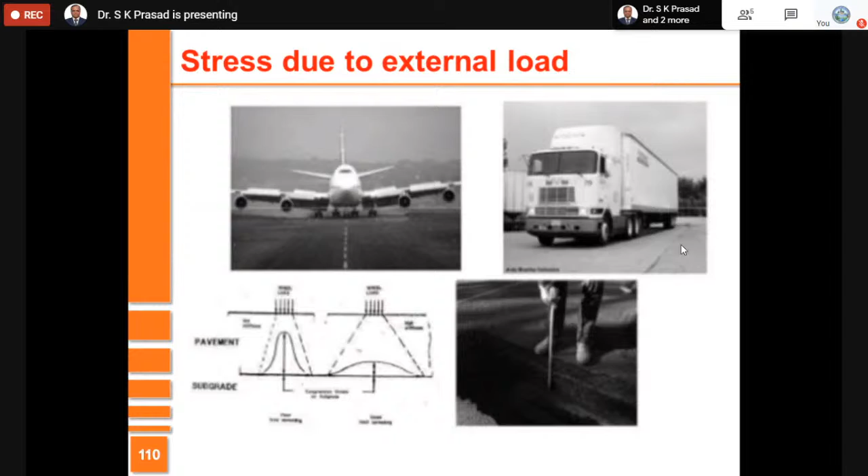For that, Boussinesq's theory is one of the most popular ones. He gave his theory based on theory of elasticity, assuming the soil to be elastic, continuous, and so on, for different types of loadings.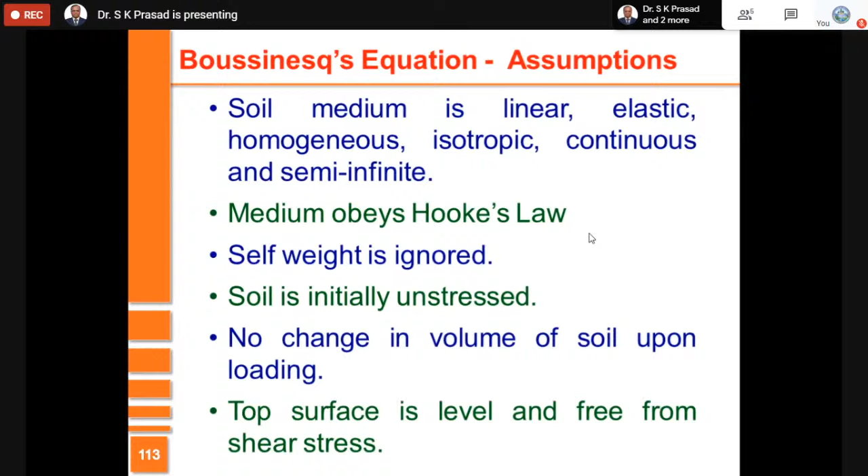These are some of the assumptions made in Boussinesq's theory. The soil mass is linear, elastic, homogeneous, isotropic, obeying Hooke's law. You neglect self-weight because its effect is taken into account separately as geostatic stress. There will be no change in the volume of the soil. The top surface is level and free, free from shear stress.

At any horizontal level, stress below the point load will be maximum. As you go radially away, the stress reduces. Similarly, in the vertical position exactly below it, the stress will be close to infinity as per St. Venant's principle. But when you move radially and horizontally, interestingly, the stress will be maximum at an angle.

This angle beta is given by 39 degrees 15 minutes. But either above this or below this, the stress will be smaller than that maximum value. You need to know this stress because when you put any structure, the total stress will be this plus geostatic stress. You should know whether the soil has sufficient strength to bear this stress. So calculation of the stress due to this structure is very important.

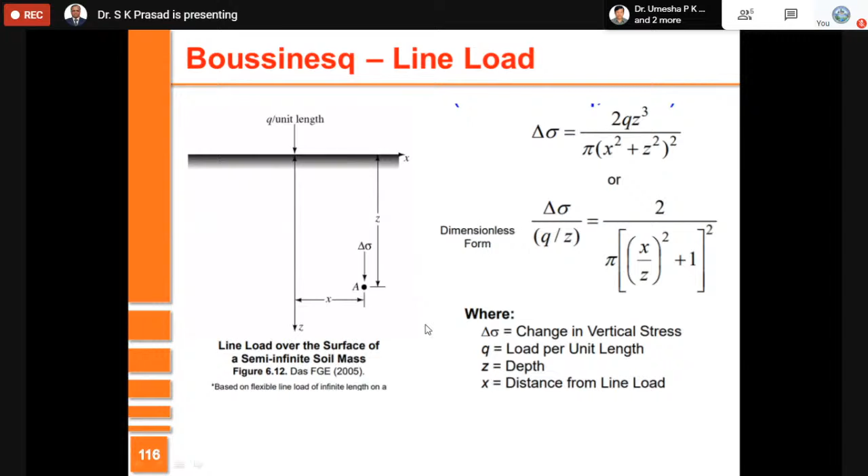You have formulae for different types of loading. For circular loading at the center, but at some depth Z, it is given by this formula. Likewise, you have the line load, acting continuously in this direction, and you have the vertical stress given by a formula here. You have a strip load, with vertical stress given by the formula here, and you also have rectangular load for which you can apply similar methods.

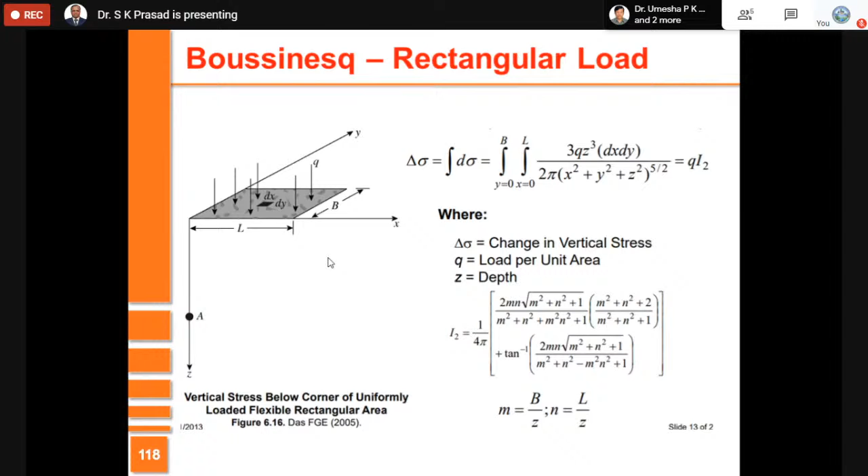Then you have contact pressure. Contact pressure is the pressure in the soil due to contact with the structure, in this case contact with the foundation. The contact pressure will be non-uniform when the foundation is rigid, and most foundations are rigid. On the other hand, in a flexible footing, contact pressure will be uniform.

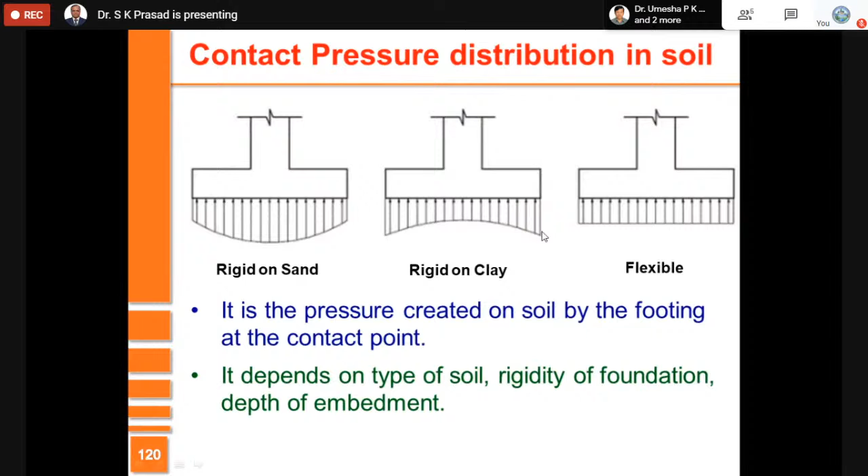When it is non-uniform, for two extreme cases: in sandy soil, the contact pressure will be something like this, and in clayey soils, it will be something like this. In sandy soil, contact pressure is maximum at the center, minimum at the edges because of the confining effect. In clayey soil, it is just the reverse because of cohesion mobilization at the edges, so there will be large edge stresses compared to the stress at the center.

So you have a few questions. Contact pressure and settlement distribution for a footing are shown here. Figure out the accurate statement. You notice here that contact pressure is not uniform, therefore the footing is rigid. And it is more at the center, less at the end, therefore it is granular soil. So A is the right answer: rigid footing in granular soil. It is not a flexible footing, and not a rigid footing in cohesive soil. Answer is A.

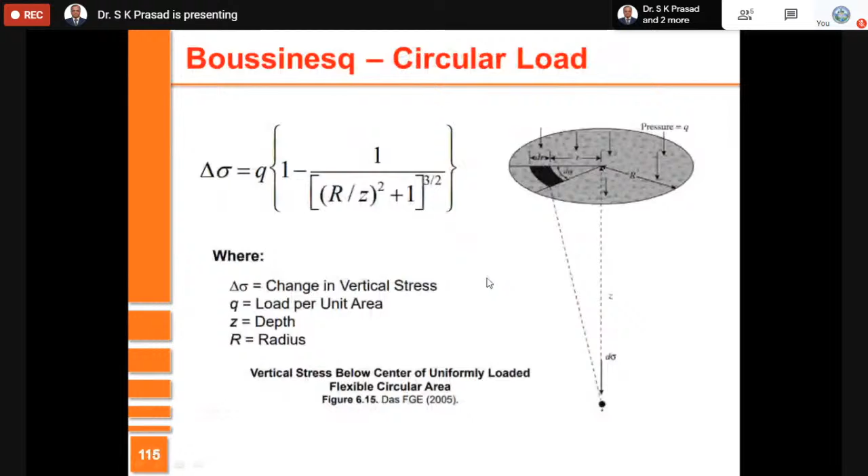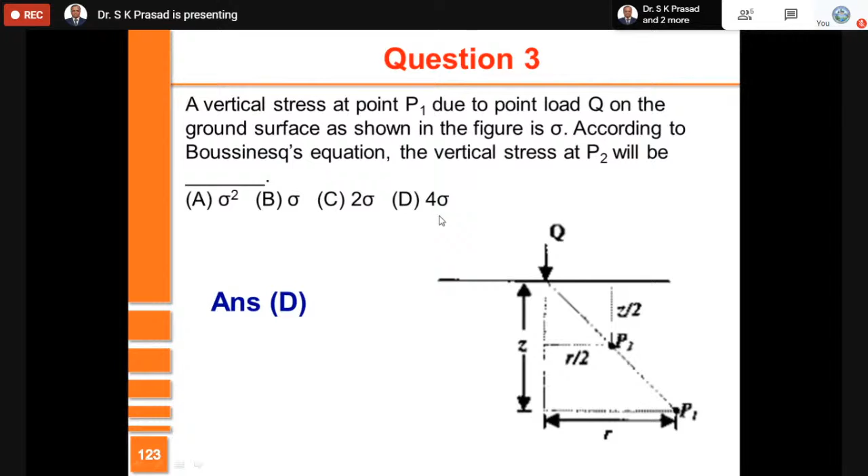So you have a pressure equal to sigma at some depth Z, at some radial distance. What is the pressure at half that depth and half that radial distance? You will notice that the pressure is equal to 4 times sigma, which is also D.

I quickly go to stability of slopes. When I cover the next lecture, I'll be talking about foundations, and if I have time and feel like talking more about these topics, I'll probably cover a little of these.

Slopes are very beautiful. We all want slopes, we want hilly terrain. But they are not going to be beautiful always, due to either external effects or internal problems. They fail and cause a lot of problems economically, and a lot of casualties also.

So slope is an exposed ground surface that stands at an angle with respect to horizontal, and it's our duty to maintain the slopes in stable condition. Slopes may be either man-made or natural.

There are a lot of slope failures and landslides, even in the Western Ghats, close to our city Mysore, or in the north, in the Himalayas. It is a common feature, and we have had many fatalities due to slope failures.

These are some historical slope failures which have caused casualties of hundreds, thousands, 10,000s, even lakhs. In this case, it is 2 lakh casualties, from a slope failure triggered by an earthquake. In another, you have 70,000. So a lot of casualties have happened because of continuous failure of slopes.

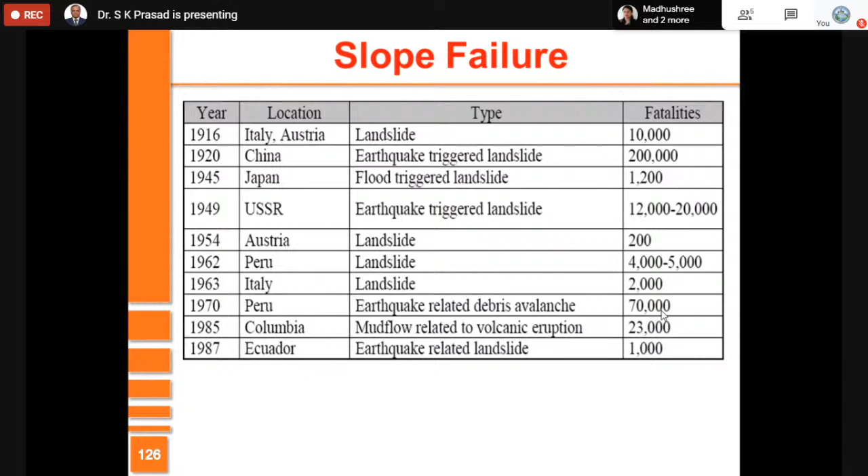So one of the duties of engineers is to control that. There are a lot of causes for slope failure that I have listed. Remember, earthquake or volcano is one natural cause. Heavy rains is another natural cause, and because of that, seepage happens.

There are also many man-made causes which we have to take into account. Any external load can definitely make the slope vulnerable. Even removal of trees can make the slope vulnerable, and failure can happen.

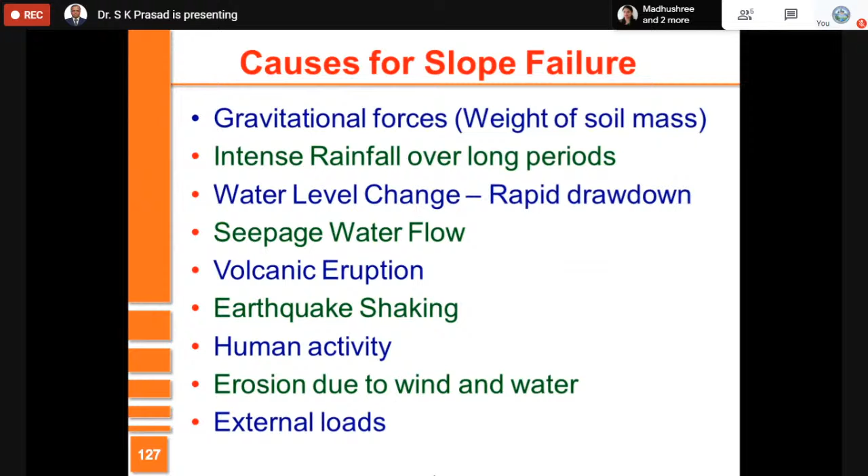So slope failure can broadly be either in terms of a slide, which is in a circular or curved mode, or a slide which is in the planar mode. So either you have rotational slides, which may be either circular or non-circular, or in a translatory mode.

In slope stability analysis, you need to first find which is the most potential failure surface. Then you have to find out the forces which cause the failure or slip, and you should know which is the restoring force, that is the shear resistance, the shear strength the soil has. Finally, our objective is to determine the factor of safety.

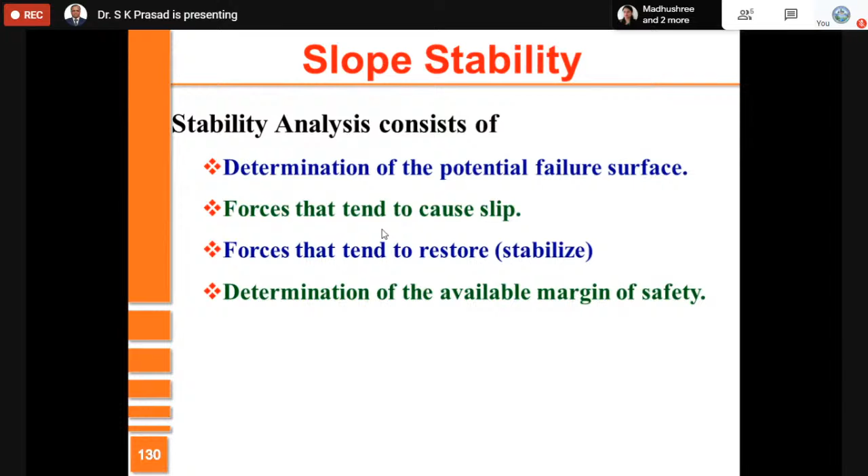You may have a slope which is infinite, or you may have a slope which is finite. A slope is called infinite when it extends for great length in one direction and great depth in another. It is the weight which is mainly responsible for the failure, which is resisted by the shear strength of the ground.

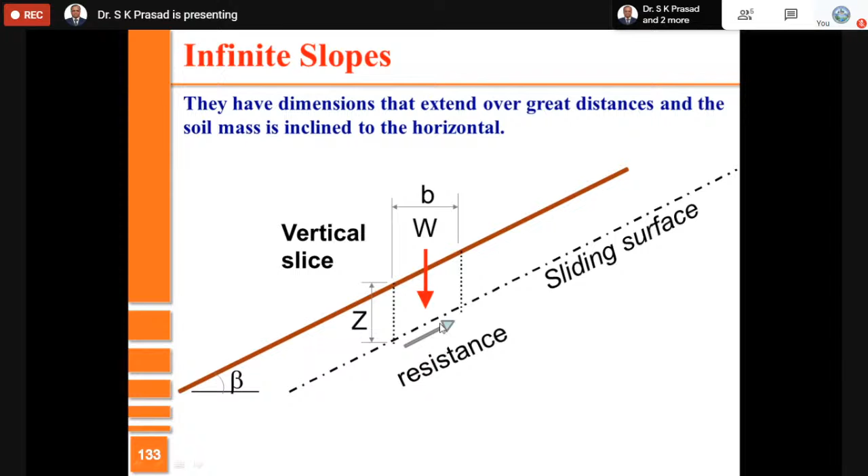You notice that factor of safety is always the ratio of tan phi by tan beta. What is tan phi? It is the strength. If you have a cohesionless soil having internal friction angle phi, then the numerator is tan phi. The slope has an angle beta, so the denominator is tan beta. You should know that factor of safety will be high when phi is greater than beta.

When beta is equal to phi, you are on the verge of failure, and the factor of safety will be equal to 1. You also should know this situation.

When the soil is in a submerged situation, there is seepage force, the water, which acts parallel to the slope, and it reduces the strength, reduces the factor of safety. This is the formula I want you to remember: same, tan phi by tan beta, but in addition, you need to add this one, submerged density divided by saturated density.

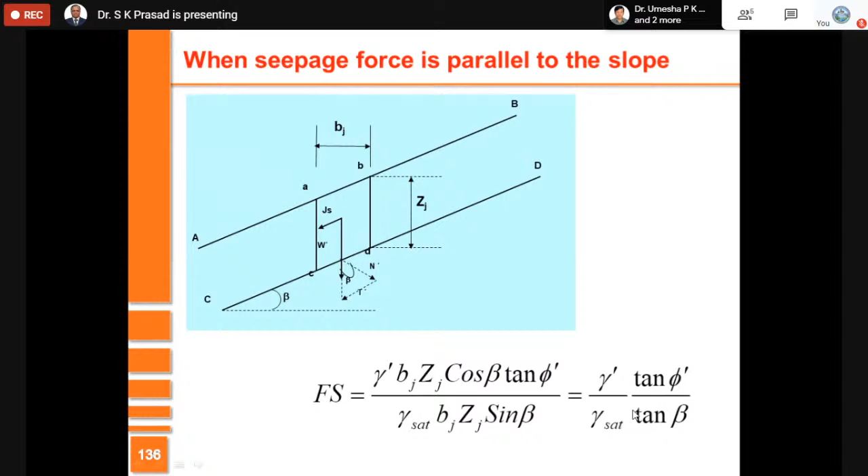So I would like you to remember this, and if you have problems related to this, you can take that. I have solved a few problems, simple ones, you can take them. There are many reading materials which are given on the net also, you can refer to them.

Geotechnical engineering is a very beautiful subject. I would like you to master this, because any civil engineer should have a good knowledge about the ground which takes care of the structure. So I want you to study this very well, and today I would just like to conclude.

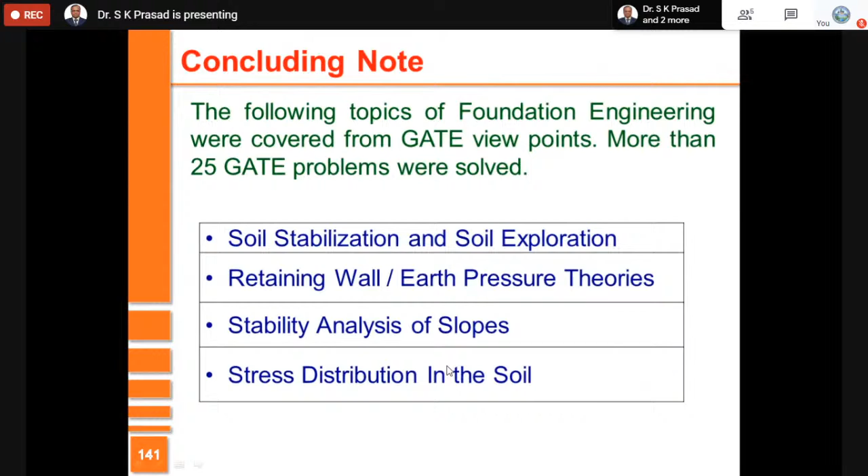So I tried to very quickly talk about these topics: soil stabilization, soil exploration, retaining wall, earth pressure theories, stability of slopes, and stress distribution. Wish you all the best and good luck for your preparation.